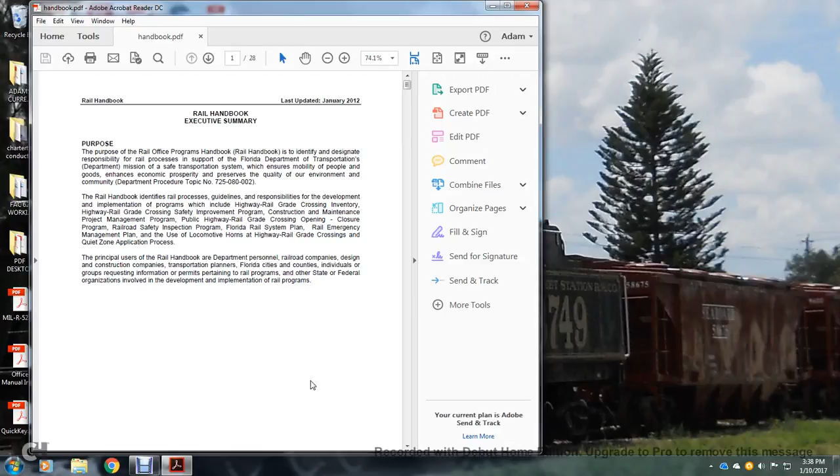All right, hi. We're reading the Florida Department of Transportation Rail Handbook Executive Summary. Last Updated January 2012.

The purpose of the Rail Office Program Handbook: the Rail Handbook is to identify the designated responsibility, rail process, and support with the Florida Department of Transportation mission, a safe transportation system which ensures the mobility of people and goods and enhances economic prosperity, preserves the quality of environment and the community. Department Procedure Topic Number...

725080002. Rail Handbook identifies the rail processes, guidelines, and responsibility for development and implementation of programs, which include Highway Rail Grade Crossing Inventory, Highway Rail Grade Crossing Safety Improvement Program, Construction and Maintenance Project Management Program, Public Highway Rail Grade Crossing Opening and Closure Program, Railroad Safety Inspection Program, Florida Railroad Safety, Railroad System Planning, Railway Emergency Management Plan, use of locomotive horns, and highway rail grade crossing quiet zone application process.

The principal users of the Rail Handbook: Department personnel, railroad companies, design and construction companies, transportation planners, Florida cities and counties, individuals and groups requesting information or permits pertaining to the rail program, and other state and federal organizations involved with the development and implementation of rail programs.

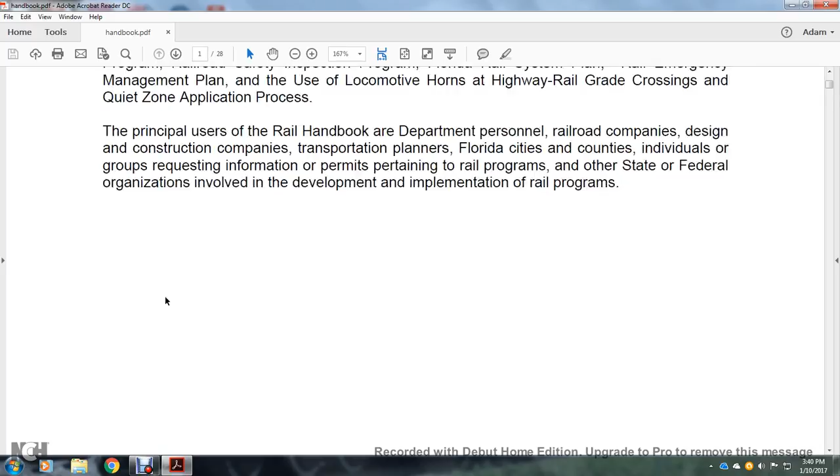Chapter 1: Highway Rail Grade Crossing Inventory. The Department's Highway Rail Grade Crossing Inventory includes the database application of the Highway Grade Crossing Inventory. The Railway Highway Grade Crossing Inventory contains the railroad highway crossing data to support the U.S. Department of Transportation Highway and the Federal Highway Administration, Federal Railroad Administration Highway Railway Crossing Safety Program and initiatives.

The Federal Railroad Administration requires the Department to collect and report data elements, including the requirements of data collection and data entry of the railway highway crossing inventory.

Data definitions: railroad crossing is an intersection of the railroad corridor with a road, roadway, or bicycle pedestrian pathway intersecting at the grade or at the grade separation of a public or private passageway. Highway rail grade crossing is a location where the railroad track is crossed at grade by a public or private roadway. The rail highway crossing inventory.

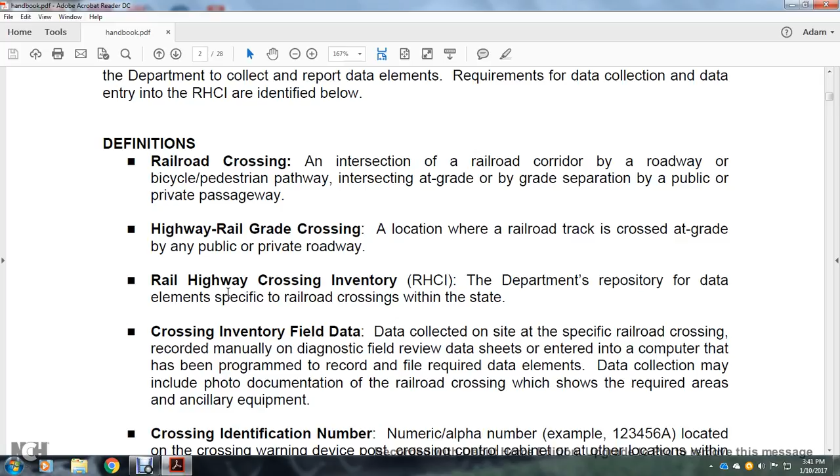The department RHCI is the department's repository for data elements specific to the railroad crossings within the state. Crossing inventory field data is the data collected on site at a specific railroad crossing, recorded manually on diagnostic field review data sheets, then entered into the computer, which has been programmed to record and file the required data elements. Data collection may include photo documentation of the railroad crossing, showing the required areas and ancillary equipment.

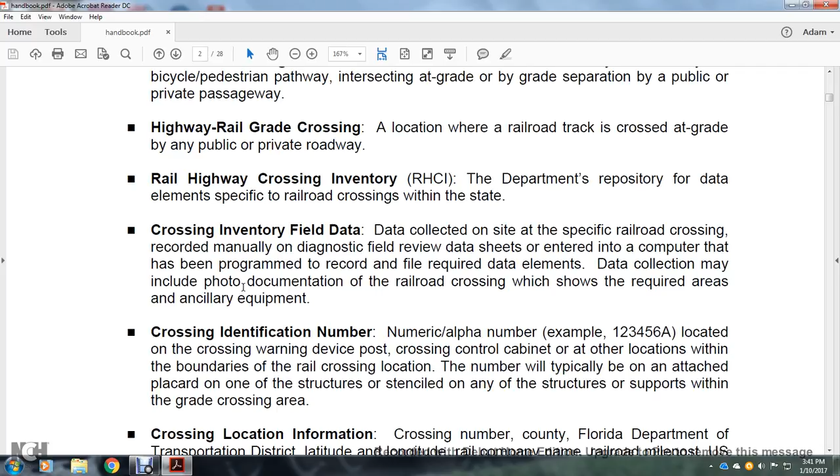Crossing identification number: the numeric alpha number, for example 123456A, located on the crossing warning device post, crossing control cabinet, and other locations within the boundaries of the railroad crossing location. The number is typically on an attached placard on one of the structures supporting the grade crossing area.

Crossing location information includes crossing number, county, Florida Department of Transportation district, latitude, longitude, rail company name, railroad milepost, U.S. route number, crossing street name or number, or any other additional information that supports the proper location of a crossing site. Crossing status indicates one of several combinations of status for the roadway and/or track.

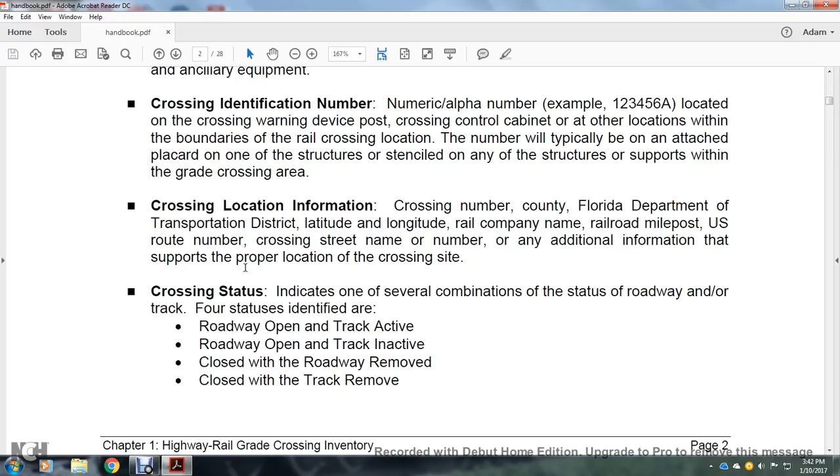Four statuses are identified: roadway open/track active, roadway open/track inactive, closed with roadway removed, and closed with track removed.

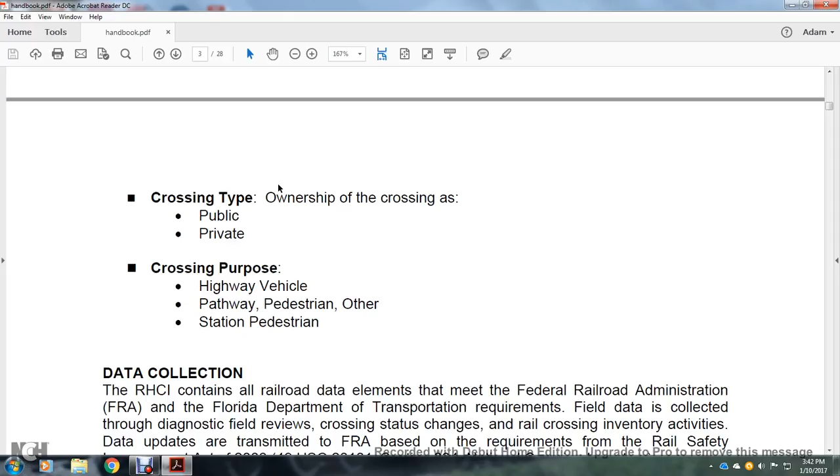Crossing type indicates ownership of the crossing as public or private, and purpose: highway vehicle, pathway pedestrian, or other pedestrian station. Data collection: the railroad highway crossing inventory contains all railroad data elements meeting the Federal Railroad Administration and Florida Department of Transportation requirements.

Field data is collected through diagnostic field reviews. Crossing status changes in the rail crossing inventory activity data are updated and transmitted to the FRA based on requirements from the Rail Safety Improvement Act of 2008, Title 49 U.S. Code 20160, Section 204, National Crossing Inventory.

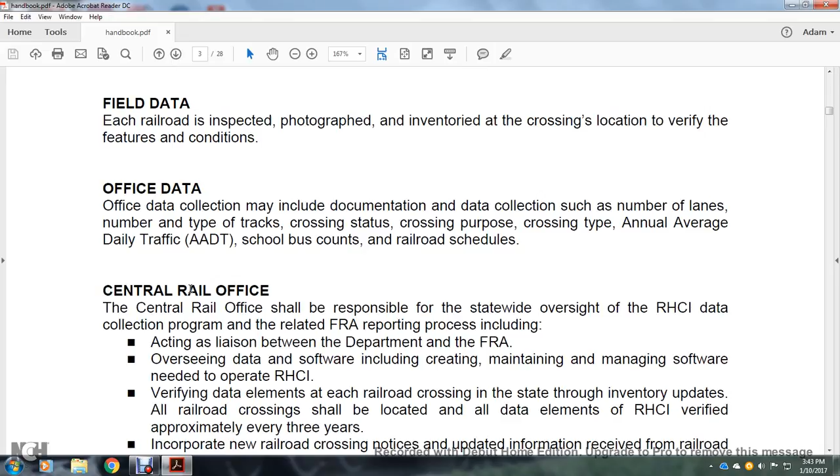Field data: each railroad crossing is inspected, photographed, and inventoried at the location to verify its features and conditions. Office data collection may include documentation such as number of lanes, number and type of tracks, crossing status, crossing purpose, crossing type, annual average daily traffic (AADT), school bus counts, and railroad schedules.

The Central Rail Office shall be responsible for statewide oversight of the railway highway crossing inventory data collection program related to the FRA reporting process, including acting as liaison between the department and the Federal Railroad Administration, overseeing the data and software, including creating, maintaining, and managing software needed to operate the railroad highway crossing inventory, and verifying the data elements for each railroad crossing in the state so that the inventory is updated and all railroad crossings are properly located.

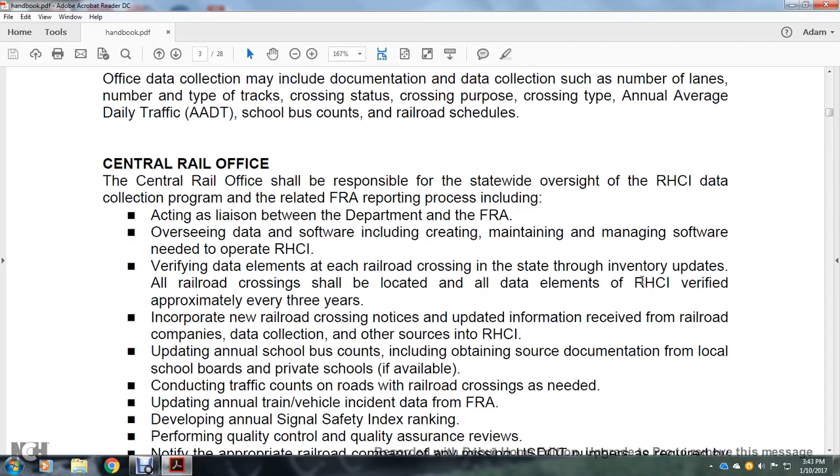All data elements for the railroad highway crossing inventory are verified approximately every 3 years, incorporating new railroad crossing notices, updating information received from the railroad company's data collection and other sources into the railroad highway crossing inventory, updating annual school bus counts including obtaining documentation from local school boards and private schools if available, conducting traffic counts on roads with railroad crossings as needed, updating annual train vehicle incident data from the FRA, developing annual signal safety index ranking, performing quality control and quality assurance reviews, and notifying the appropriate railroad company of any missing U.S. DOT numbers as required by the FRA.

District offices: the district rail coordinators shall provide technical data field support with collecting the crossing characteristic modifications as identified crossing status changes, openings, closures, new installations. The impact on the railroad highway crossing inventory should be reported.

The railway highway crossing inventory updates include population of the railroad highway crossing inventory when a railroad crossing is officially opened or closed, upgraded or modified, verifying the protection, project completions, closures and changes. Update the railroad highway crossing inventory when a new crossing warning device or service is installed, and when the railroad submits a new U.S. DOT grade crossing inventory form. Forward the completed U.S. DOT Department of Transportation grade crossing inventory form to the FRA, with compliance through the Central Rail Office.

Chapter 2, Highway Railway Grade Crossing Safety Improvement Program.

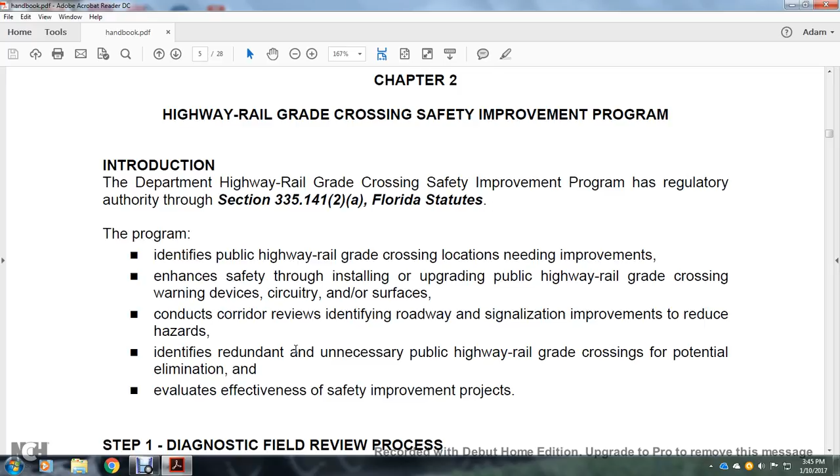Introduction: the Highway Railway Grade Crossing Safety Improvement Program has regulatory authority under section 335.141(2)(a) Florida State Statutes. The program identifies public highway railway grade crossing locations needing improved and enhanced safety through installing and upgrading public highway rail grade crossing warning devices, circuitry, and/or surfaces; conducting corridor reviews and identifying roadway signalization improvements to reduce hazards; identifying redundant and unnecessary public highway railway grade crossings for potential elimination; and evaluating the effectiveness of safety improvement projects.

Step 1, Diagnostic Field Review Process: incidents are entered into the Railroad Highway Crossing Inventory by May. The Central Rail Office enters the rail crossing incidents into the Railway Highway Crossing Inventory for the preceding calendar year and calculates the safety index for each crossing.

A priority list of crossings for review is created during May. Each district rail coordinator will review the safety index report from the railway highway crossing inventory, listing crossings based on the safety index rank. The priority listing can be adjusted by eliminating and adding crossings based on the existing warning device compared with the recommended warning device. Crossings on a prior diagnostic field review list are determined to be poor candidates for safety signal improvement at the time, unless conditions have changed.

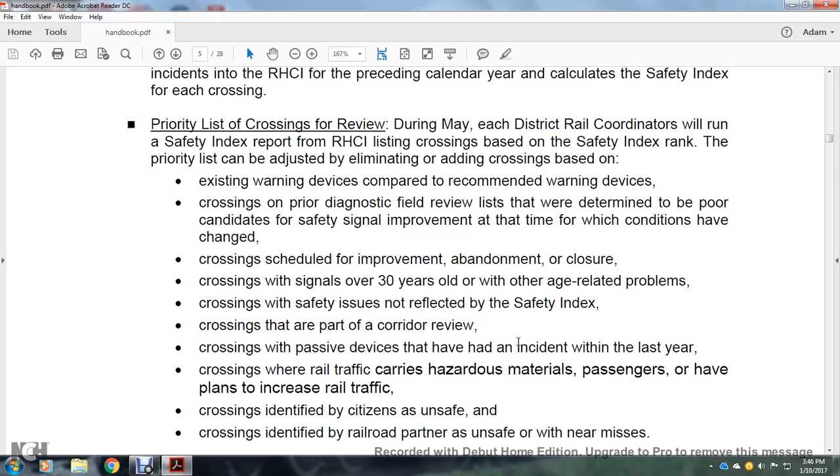Crossings scheduled for improvement, abandonment, and closure. Crossings with signals over 30 years old or other age-related problems. Crossings with safety issues not reflected in the safety index. Crossings as part of a corridor review. Crossings with passive devices that have had incidents in the last year. Crossings where rail traffic carries hazardous materials or passengers with plans to increase rail traffic. Crossings identified by citizens as unsafe. Crossings identified by railroad partners as unsafe or with near misses.

Schedule for the diagnostic field review: the Central Rail Office will coordinate the schedule of diagnostic field reviews with each district rail coordinator. The general time frame for the reviews is during the summer, from May to August. The district rail coordinator will determine the diagnostic field review locations and coordinate with the railroad companies and local agencies.

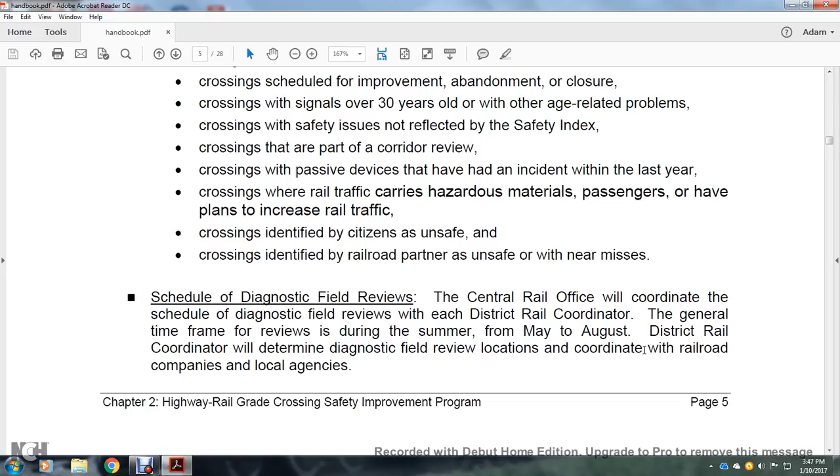The diagnostic field review team members at each district will prepare the diagnostic field review data sheets and incident reports for each crossing to be reviewed. The diagnostic field review team should be...

multidisciplinary, with the ability to evaluate conditions and recommend crossing safety improvements. It should include the central district rail representative, district safety and/or traffic operations engineering, railroad personnel if applicable, and engineering personnel from the city or county with jurisdictional authority over the crossing. These parties should be notified by the district railway coordinator with the time, place, and crossing data information. The district rail coordinator will confirm each team member's participation in the review.

The diagnostic field review team observations should include railroad classification (mainline, branch, industrial spur), train traffic mix, switching, through or passenger operations in the vicinity of the crossing, crossing condition, visibility, warning devices including advance warning signals and pavement markings, and other traffic control devices contributing to vehicles stopping on the crossing that may require signal preemption.

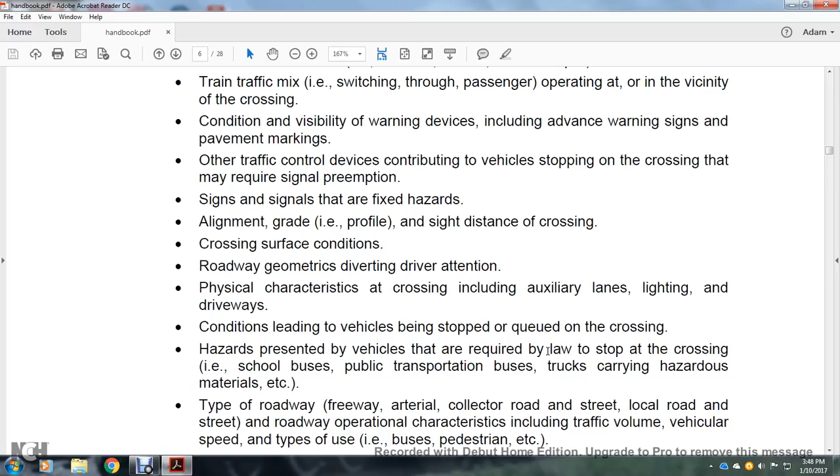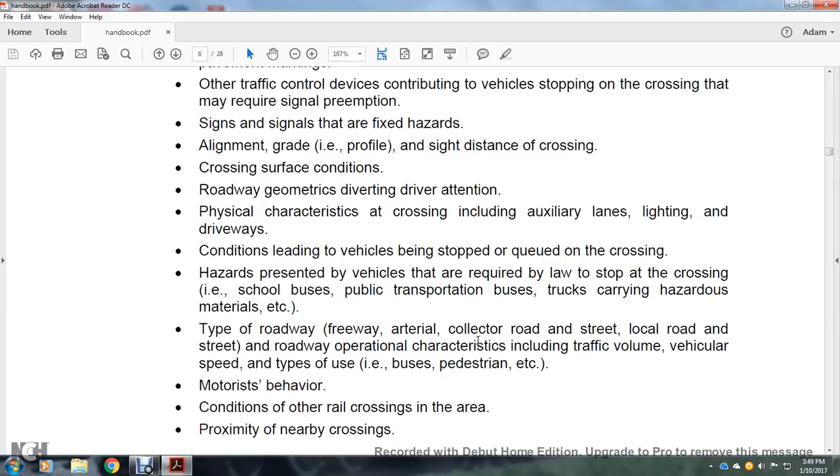Signs and signals that are fixed hazards, alignment, and grade profile, and sight distance of the crossing, crossing surface conditions, roadway geometrics, diverting of the driver attention, physical characteristics of crossing including auxiliary lines, lanes, lighting, and driveways, conditions leading to vehicles being stopped and queued on the crossing, hazards presented with the vehicles required by law to stop at the crossing, i.e. school buses, public transportation buses, trucks carrying hazardous materials, etc. Type of roadway, freeway, arterial, collector roadway, streets, local roads and streets, roadway operational characteristics including traffic volume, vehicular speed, and type of use, buses, pedestrians, etc. Motorist behavior, conditions of other rail crossings in the area, proximity to nearby crossing.

The diagnostic field review team data collection. The diagnostic field review team will note the crossing information that is incorrect or missing later in the entry of the railway highway grade crossing inventory.

The diagnostic field review team recommendations based on the evaluation of the crossing. The team may recommend the following safety improvements compliant with Chapter 14-57.012(3) of the Florida Administrative Code, Florida Department of Transportation Design Standards Topic Number 625010003, and the Manual on Uniform Traffic Control Devices (MUTCD): the DOT crossing number identification, emergency notification system signs, flashing lights and gates.

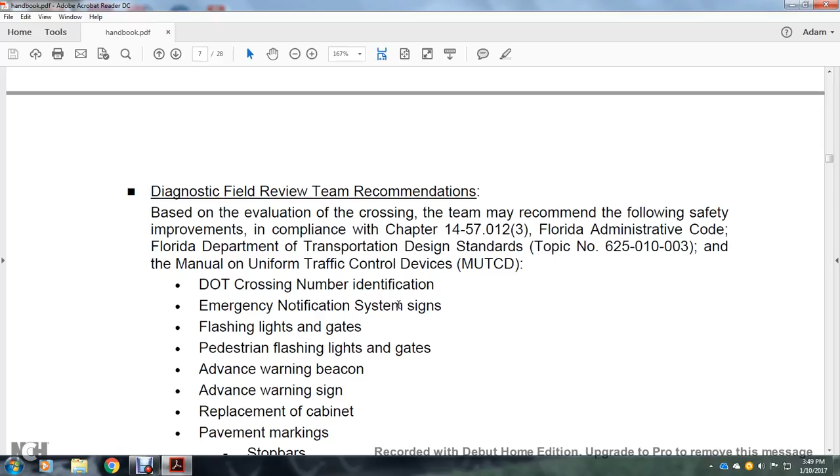Pedestrian flashing lights and gates, advanced warning beacon, advanced warning sign, replacement of the cabinet, pavement markings, stop bars, railroad crossing marks, additional signage, pavement markings, do not stop on the track, and number of the track signs, yield sign, stop sign, low ground clearance sign, ADA improvement signage, overhead illumination, traffic and signal installation preemption, advance and simultaneously.

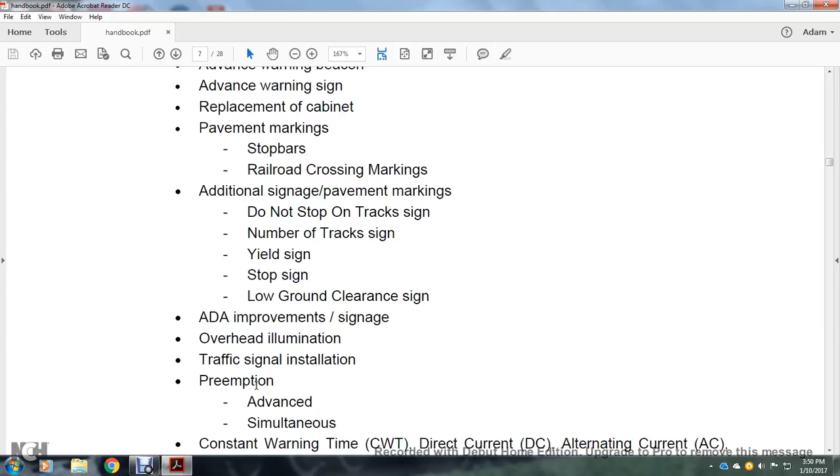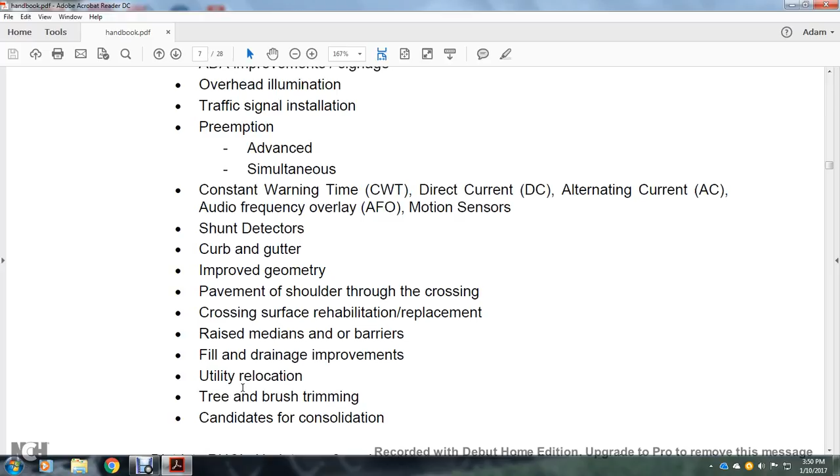Constant warning time (CWT), direct current, alternating current, audio frequency overlay, motion sensor, shunt detectors, curb and gutter, improve the geometry, pavement, shoulder through the crossing, surface rehabilitation, replacement, raised medians, barriers, fill and drainage improvements, utility relocation, tree and brush trimming, and candidates for consolidation.

District Railway Highway Crossing Inventory Update. Crossing data corrections and additions acquired during the diagnostic field review will be updated with the Railway Highway Crossing Inventory with the District Rail Coordinator.

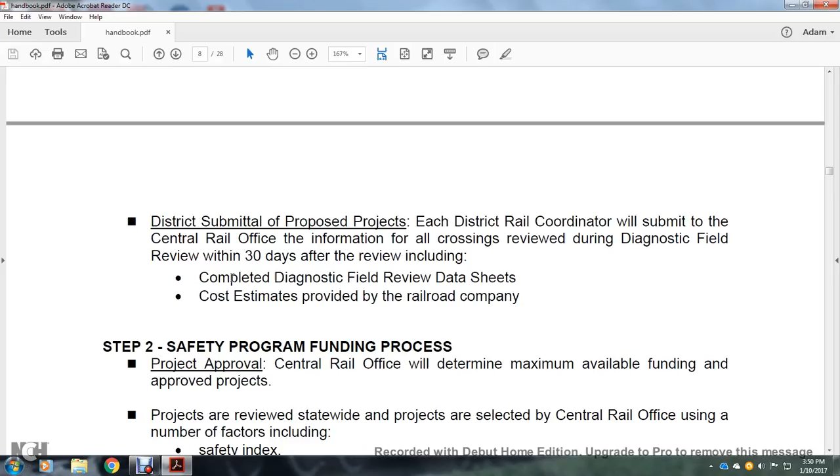The district submits the proposed project; the district rail coordinator will submit to the central rail office information on all crossings reviewed during the diagnostic field review within 30 days after the review, including the complete diagnostic field review data sheets and cost estimates provided by the railroad company. Step 2 Safety Program funding process.

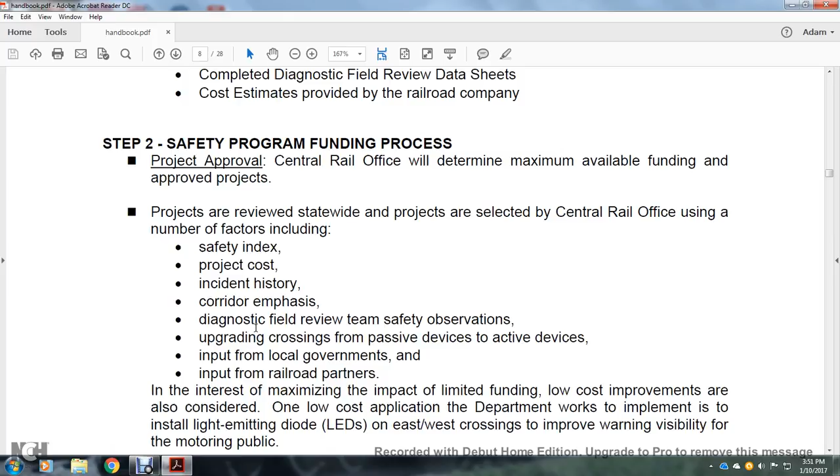Project approval: the central rail office determines the maximum available funds and approves projects reviewed statewide. Projects are selected by the central rail office using a number of factors, including safety index, project costs, incident history, corridor emphasis, diagnostic field review team safety observation, upgrading of passive devices to active devices, local government input, and railroad partners. In the interest of maximizing impact with limited funding, low-cost improvements are also considered.

One of the low-cost applications the department works to implement is to install light emitting diodes, or LEDs, on the east and west crossings to improve the warning and visibility for the motoring public.

Federal aid and project number assignment: the central office will submit the list of candidate projects for federal aid office approval. Encumbrance of funds: each district will encumber the funds with the comptroller's office for each safety improvement project.

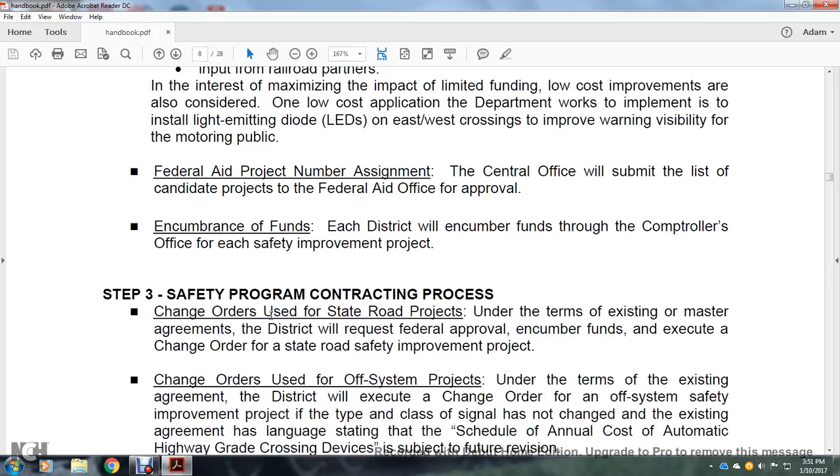Step 3, Safety Program Contracting Process. Change orders used for state road projects under the terms of existing or master agreements: the district will request federal approval for encumbering funds.

Execute change orders for state road safety improvement projects. Checking and change orders used for off-system projects under the terms of existing agreements: the district will execute the change order for the off-system safety improvement project if the type and class of signal has not changed from existing agreements.

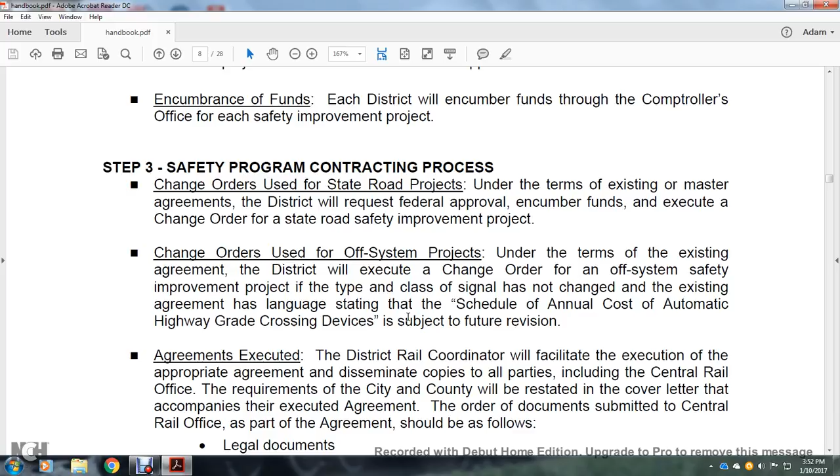The agreement has language stating that the schedule of annual costs of the automatic highway grade crossing devices is subject to future revision. Agreements executed with the District Rail Coordinator will facilitate execution of the appropriate agreement, disseminating copies to all parties, including the Central Rail Office.

The requirements of the City and County will be restated in the cover letter that accompanies the executed agreement. The order of documentation submitted to the Central Rail Office as part of the agreement should be as follows:

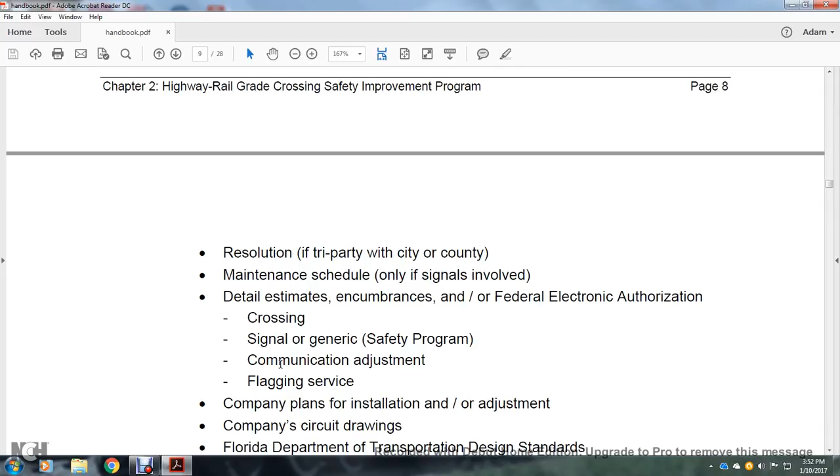Legal documents, resolutions if tri-party with the City or County, maintenance schedule only if signals are involved, detailed estimate, encumbrance and federal electronic authorization, crossing signal generic safety program, communication adjustment, flagging service, company plans, installation adjustment, company circuit drawings, and Florida Department of Transportation Design Standards 560 if crossing signals are involved.

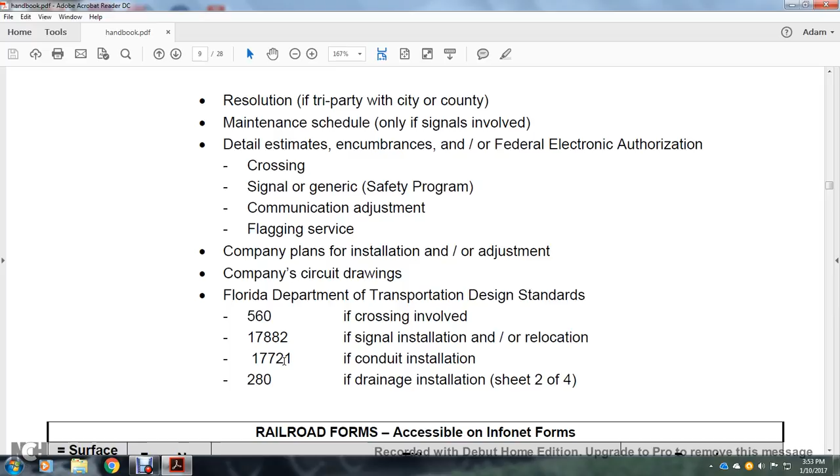Design Standard 17882 if signal installations or relocation; 17721 if conduit installation; 280 if drainage installation, sheet 2 of 4.

This shows the accessible railroad forms in Infonet: railroad daily diary, railroad changing order, railroad relocations schedule, work description, grade crossing new/reconstruction work description, grade crossing traffic control device, and railroad reimbursement agreement for grade crossing.

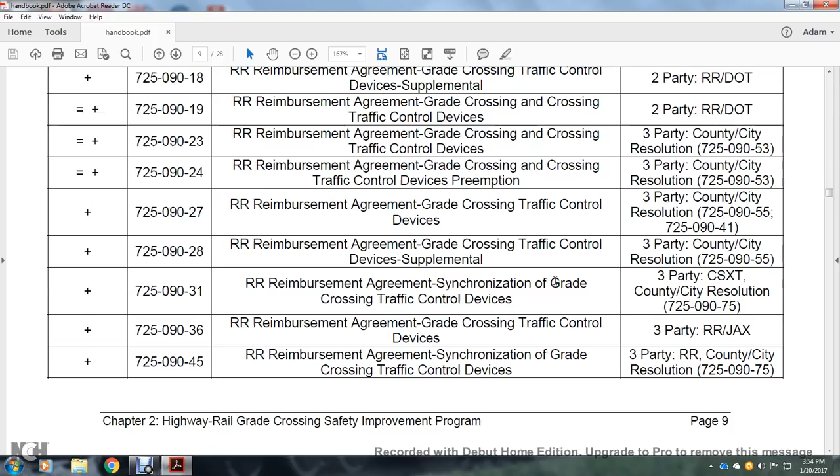Additional forms include the railroad reimbursement agreement grade crossing traffic control device supplemental, synchronization of grade crossing traffic control devices, County City Resolution for grade crossing traffic control device (including three-party versions), synchronization grade crossing traffic control device, and notice of reimbursable or non-reimbursable utility construction work.

Step 4, construction installation process: preliminary engineering design. Preliminary engineering made by the railroad company begins with verification of the project scope letter from the district. The district reviews the design package and submits approval for the railroad with notice to proceed with construction installation.

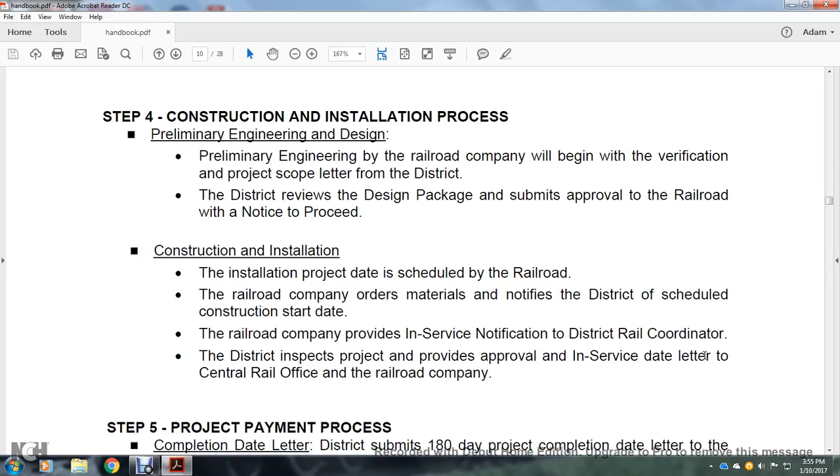The installation project is scheduled with the railroad. The railroad company orders the materials and notifies the district of the scheduled construction start date, then provides in-service notification to the District Rail Coordinator. The district inspects the project, provides approval, and issues the service date letter to the central rail office and the railroad company.

Step 5, project payment process: completion date letter. The district submits a 180-day project completion date letter to the railroad. The final bill from the railroad is received by the district within 180 days, and the district furnishes payment within 45 days.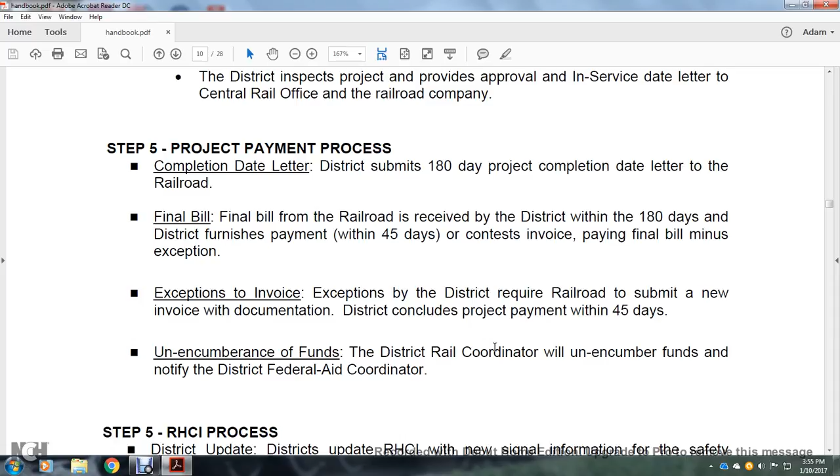The district contests the invoice, paying the final bill minus exceptions. For exceptions, the district requires the railroad to submit new invoice documentation, and the district concludes the project payment within 45 days. Unencumbered funds go to the district rail coordinator with the encumbrance fund, who notifies the district federal aid coordinator.

Step 5 (railroad highway crossing inventory process): district update. The district updates the railroad highway crossing inventory with the new signal information for the safety improvement project.

Step 6, program evaluation: six years before and after report. Each July, the Central Rail office will submit a six-year before and after report. The report is a project cost summary comparing incidents with track volume over the periods of six years before and six years after project completion, including quality assurance reviews on selected projects for compliance with these processes.

Lump sum payments may be made when the railroad and department agree to this method. The eligible railroad work is limited to $100,000 maximum reimbursement, and includes high intensity reflectorized crossbuck projects, warning device upgrades, light lens replacement programs, and crossing inventory and identification projects.

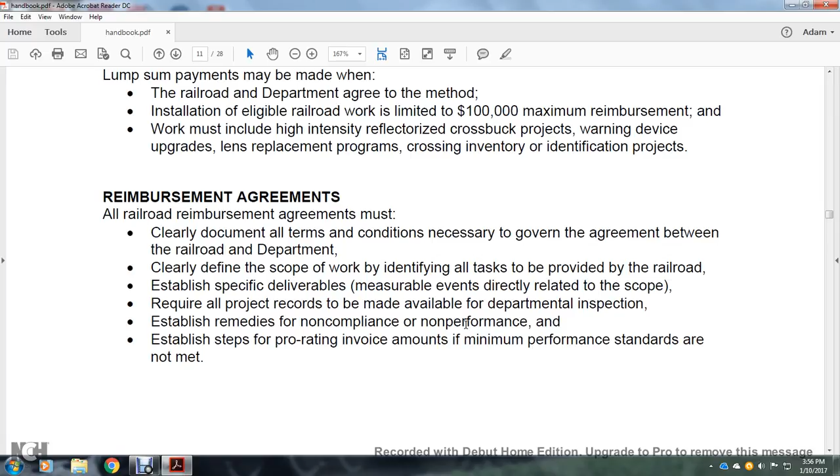Reimbursement agreement: the railroad reimbursement agreement must clearly document all terms and conditions necessary for the agreement between the railroad and department, clearly define the scope of work, identify all tasks provided by the railroad, establish and specify deliverables and measurable events directly related to the scope, require all project records be made available for department inspection, and establish remedies for non-compliance and non-performance, including steps for prorating invoice amounts when minimum performance standards are not met.

Chapter 3: Highway-Rail Grade Crossing Construction and Maintenance Project Management Program. Introduction: construction and maintenance of highway-rail grade crossings, including new construction, reconstruction, widening, and/or resurfacing of the road at or near the right-of-way of the highway-railway grade crossing, requires negotiation with the railroad and local governments in accordance with Section 337.11 Florida Statutes and Rule Chapter 14-57 Florida Administrative Code.

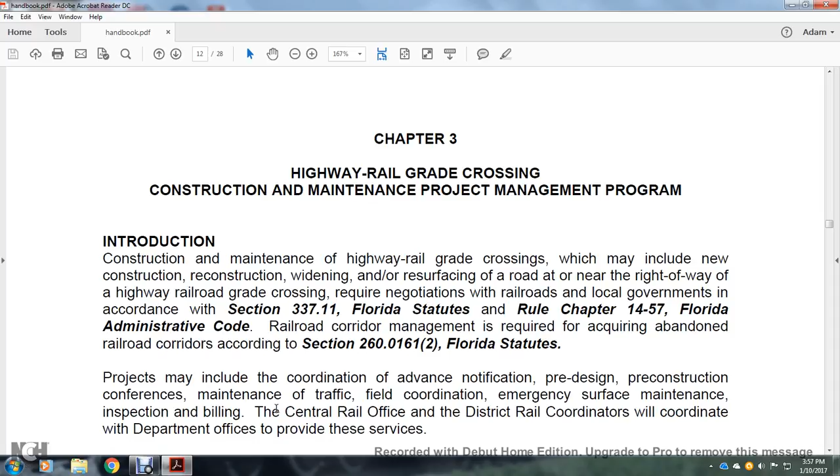Railroad corridor management is required for the acquisition of abandoned railroad corridors according to Section 260.0161 Florida State Statute. Projects include coordinated advance notification, pre-design and pre-construction conferences, maintenance of traffic and field coordination, emergency surface maintenance, inspection, billing, and the Central Rail Office. The District Rail Coordinator coordinates with the Department Office to provide these services.

The Central Rail Office's responsibilities are necessary to provide the district with project development, submit project data to the Federal Aid Office, scheduling and coordinating flagging, leading efforts with railroad construction projects involved in work not associated with highway-rail grade crossing warning devices and surface maintenance, and leading the development of any agreement negotiated with railroad partners.

Ensure compliance with requirements assigned to the Department by the Memorandum of Agreement between the Florida Department of Environmental Protection and the Department regarding the abandonment of railroad corridor rights of way.

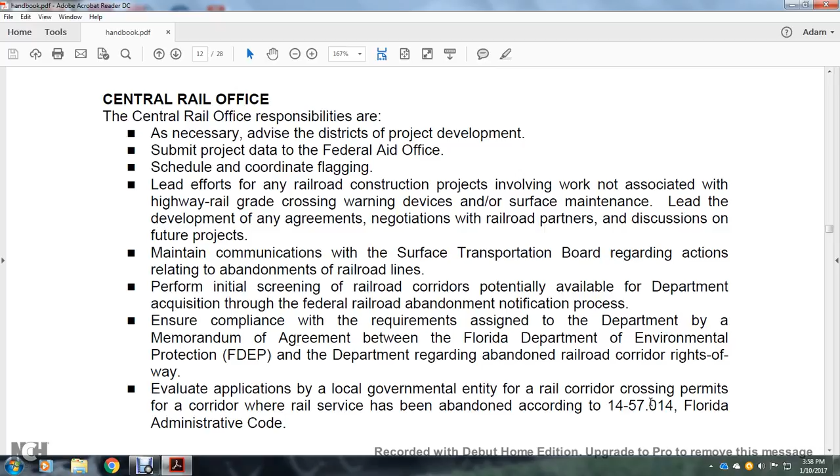Evaluate the application by the local government entity for rail corridor crossing permits for a corridor where rail service has been abandoned, in accordance with Section 14-57.014, Florida Administrative Code. District Rail Coordinators.

The District Rail Coordinator is responsible for reviewing plans to determine eligible reimbursement costs for removal, relocation, and installation of railroad facilities, construction project limitations, and submitting construction contract documents, including work description sheets and construction plans, to the railroad company.

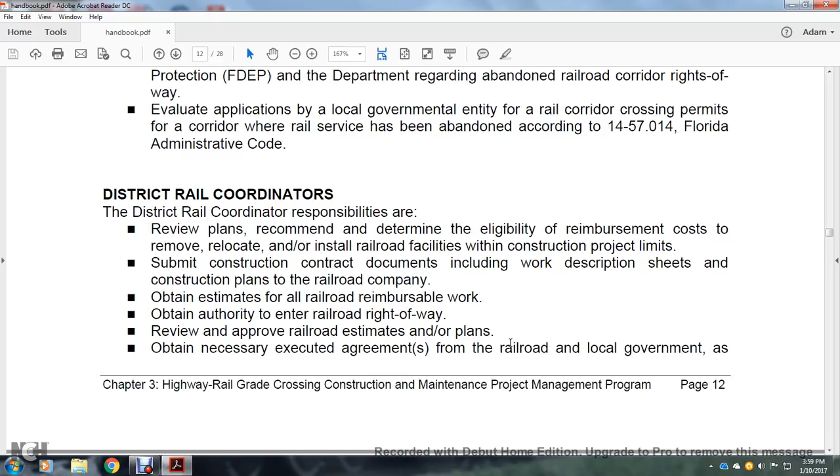Obtain estimates of the railroad reimbursement work, obtain authority for entry onto railroad right-of-way, review and approve railroad estimates and/or plans, obtain necessary executed agreements with the railroad and local government as required, obtain funding, ensure execution of the agreement and change orders, and distribute agreements and change orders to all parties.

Ensure authority to proceed with the work, attend the pre-construction conference with the highway contractor and railroads to identify responsibilities, establish the schedule of work, schedule and coordinate flagging, and coordinate emergency surface maintenance repairs within the Department of the railroad.

Coordinate any railroad construction projects involving work associated with the highway, railway road crossing, and warning devices, surface maintenance with the Central Office of Rail staff, and coordinate development of agreements and negotiations with railroad partners.

Discuss future projects, conduct site review prior to commencement of work on the railroad right-of-way for replacement or relocation of facilities, conduct daily inspections, request daily reports to department personnel on construction progress of the railroad right-of-way, and obtain final inspection documentation to ensure project compliance and approve invoices for satisfactorily completed work.

Identify state road crossing locations that are affected by the abandonment of railroad corridors, notify the District Right-of-Way Administrator of these locations, and request the acquisition of crossing areas in order to secure integrity of the state railroadway.

Chapter 4: Public Highway Rail Grade Crossing Opening and Closure Program.

Introduction. The Department has regulatory authority over all public railroad highway grade crossings in the state, including the authority to issue permits, which shall be required prior to opening and closing such crossings.

Section 335.141, Florida State Statutes. Definition: Applicant. Any person or group impacted, with the crossing railroad operating through the crossing, governmental entity of jurisdiction over the road, and the Department.

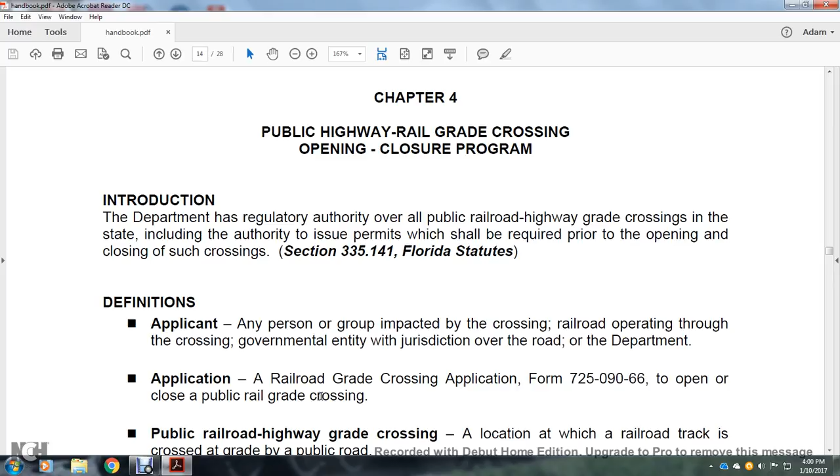Application of the railroad grade crossing application form 725-090-66 to open and close a public railroad grade crossing, a location at which the railroad track is crossed at grade by a public road. Stipulation: a voluntary agreement between the Department and the railroad, government entity, and parties with standing.

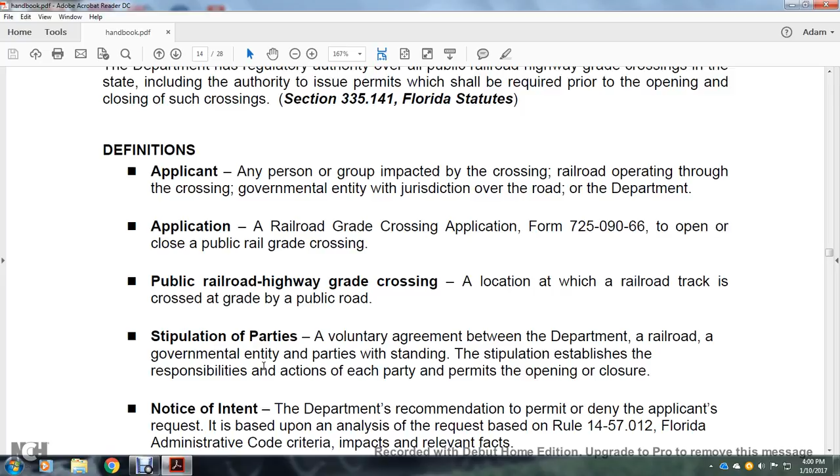Stipulation establishes the responsibility and actions of each party for permitting the opening and closure. Notice of the Department's recommendation to permit or deny the application request based upon analysis of the request.

Based on Rule 14-57.012, Florida Administrative Code, criteria, impacts, and relevant facts.

Administrative hearings: a hearing based on Section 120, Florida State Statutes, in which the administrative law judge hears testimony and arguments on all issues involved, resulting in a recommended order. The order entered by the administrative law judge following the hearing supports the order to either deny or allow the opening and closure.

Final order: the order issued by the Department Secretary may be adoption of the recommended order, or may overrule the order and authorize denial of the application's request.

Rule 14-57.012, Florida Administrative Code, criteria in accordance with the application to open and close the public railway highway grade crossing. The following criteria will apply: status, safety, necessity of the railway, vehicle traffic, alternate routes, and the effect on rail operation expense.

Extensive restrictions on emergency vehicles resulting from closure of one or more public crossings, offset by opening a new crossing; design of the grade crossing and road approaches; the presence of multiple tracks that affect railroad and highway operations; and the administrative process.

The function and facility of the public highway railway grade crossing process is conducted with the Central Rail Office, with the following.

The Central Rail Office reviews the application to ensure the necessary information is provided with the crossing of the public at the grade railway crossing. The Central Rail Office acknowledges receipt and seeks the response of all affected parties, but does not primarily participate in the evaluation.

The application must establish compliance with the criteria of 14-57.012 Florida Administrative Code. The Central Rail Office may facilitate negotiation and resolve differences if the application meets the criteria of 14-57.012, and the Florida Administrative criteria is agreed upon by all parties.

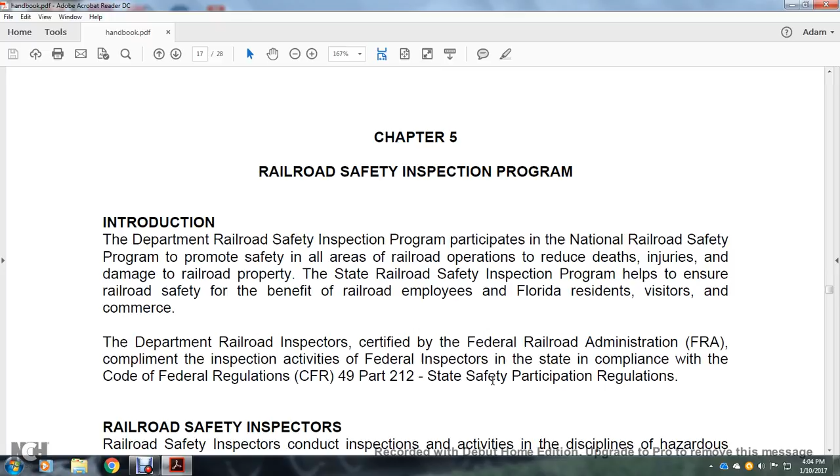Railroad Safety Inspectors conduct inspection activities and disciplines in hazardous materials, motive power and equipment, operating practices, signal and train control, and track inspection overall.

Program inspectors receive training and certification, and use laptop computers issued by the FRA for continuing inspection through the state, completing at least one inspection report for each day of inspection.

The report will include a list of the number of units inspected and a detailed report of any defects or violations, sent in a timely manner to the FRA and the railroad.

Inspectors cover Amtrak, commuter railway operations, Class 1 through 3 railroads, seaport terminal switching companies, and tourist railroads, providing information and guidance for railroad compliance with federal regulations.

Inspectors examine businesses that ship or receive transloaded hazardous materials, recommend civil penalties for non-compliance with federal regulations, conduct complaint investigations, and conduct incident and collision investigations supporting the FRA and the National Transportation Safety Board.

Hazardous Material Inspector: The Railroad Safety Inspector for Hazardous Material, RSI-HM, conducts inspections under CFR 49, Parts 171 through 174, Title 49 U.S. Code, Chapter 51, federal regulation of the transportation of hazardous materials, in cooperation with the Federal Railroad Administration, Homeland Security, the Transportation Security Agency, and local authorities.

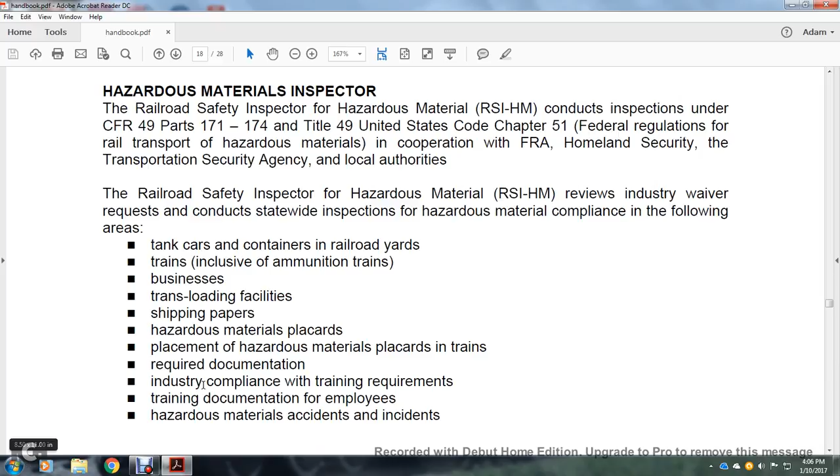The Railroad Safety Inspector for Hazardous Material reviews industry waiver requests and conducts statewide inspections for hazardous material compliance in the following areas: tanker cars, containers, and railroad yards; trains, inclusive of ammunition trains; businesses and transloading facilities; shipping papers and hazardous material placards; placement of hazardous material placards on trains; required documentation; industry compliance with training and equipment requirements; and training documentation for employees regarding hazardous material accidents and incidents.

Motive power and equipment. The Railroad Safety Inspector for motive power and equipment conducts inspection throughout the state of passenger locomotives, cars, freight locomotives, and industrial equipment, and prepares the railroad rolling stock inspections per federal regulation Title 49 CFR Part 215, 223, 229, 231, 232, 238, and 239.

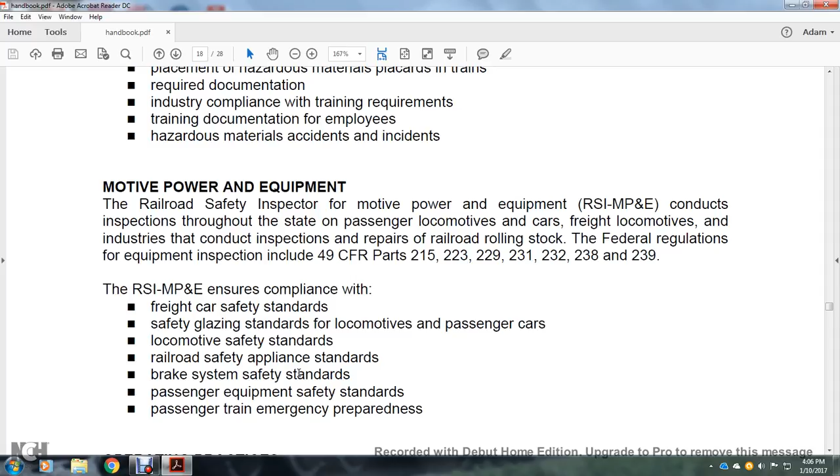The Railroad Safety Inspector of motive power and equipment ensures compliance with freight car safety standards, safety glazing standards for locomotives and passenger cars, locomotive safety standards, railroad safety appliance standards, brake system safety standards, passenger equipment safety standards, and passenger train emergency preparedness.

Operating practice: the Railroad Safety Inspector for operating practice ensures compliance with operational regulations found in Title 49 CFR Part 214, 217, 218, 219, 220, 221, 222, 225, 228, 232, and 240.

Inspections include compliance with the following areas: railroad operation safety rules, regulations concerning training and testing of operating employees, protection of employees working on the track or equipment, drug and alcohol prohibition, railroad communications and training identification, use of locomotive horns, accident and incident injury reporting, hours of service for operating employees, securing unattended equipment, and engineer certification.

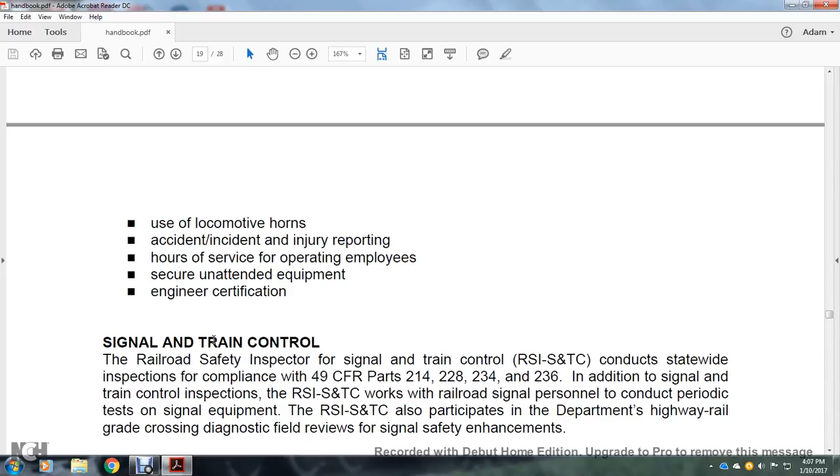Signal and train control. The Railroad Safety Inspector for signal and train control conducts statewide inspection for compliance with Title 49 CFR Part 214, 228, 234, and 236.

In addition to signal and train control inspection, the Railroad Safety Inspector works with railroad signal personnel to conduct periodic tests on signal equipment, and also participates in the Department's Highway Railway Grade Crossing Diagnostic field reviews for signal and safety enhancement.

Railroad safety inspection includes highway railway grade crossing signals, railroad wayside signals, cab signals, wayside locomotive apparatus, and positive train control systems.

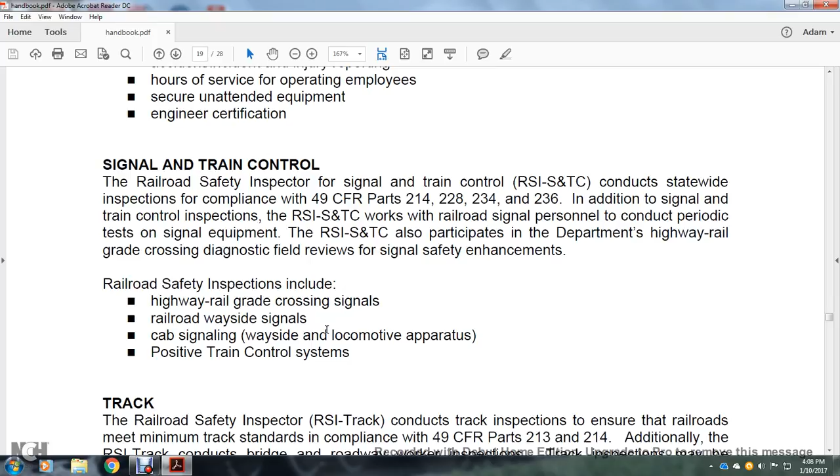Track. The railroad safety inspector conducts track inspection duty to ensure the railroad meets minimum track standards in compliance with Title 49 CFR Part 213 and 214. Additionally, the railroad track safety inspector conducts bridge and roadway work inspections.

Track inspection may be conducted with a high rail vehicle traveling on the track, walking inspection, or FRA geometry cars. Observations may also be made while moving, by riding in the locomotive or the rear car of passenger trains.

Chapter 6, Florida Rail System Plan. The Department is responsible for developing the Florida Rail System Plan according to Section 341.302(3) of the Florida Statute. The Rail System Plan includes identification of priorities, programs, and funding levels required to meet statewide needs. The plan must be updated every 5 years to cover passenger rail service and freight rail service.

The plan must be consistent with other transportation planning conducted by the Department, with recognition of the role rail plays in the state's overall transportation system.

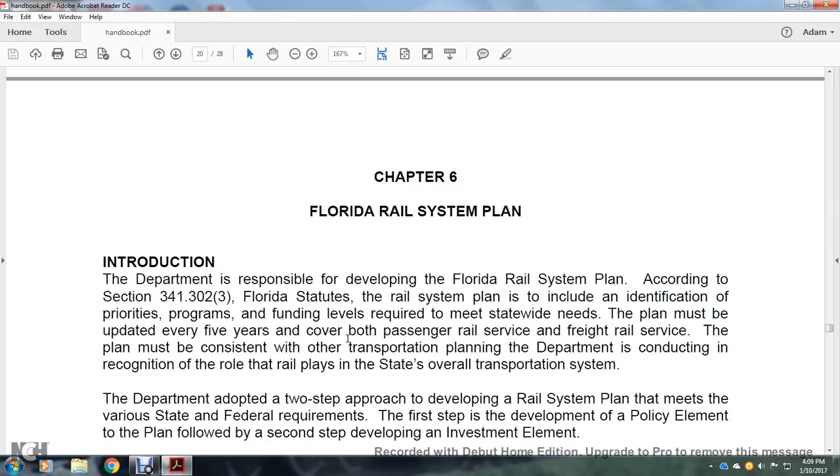The Department adopts a two-step approach to developing the rail system plan that meets various state and federal requirements. The first step is development of the policy element of the plan, followed by the second step of developing the investment element. The policy element establishes a vision for passenger and freight rail transportation in Florida, with a policy framework of goals and strategies to guide future state rail investments and decisions.

The investment element identifies inventory needs and establishes priority investments of state funds, using the policy framework set forth in the policy element to define the future action steps necessary to implement the plan.

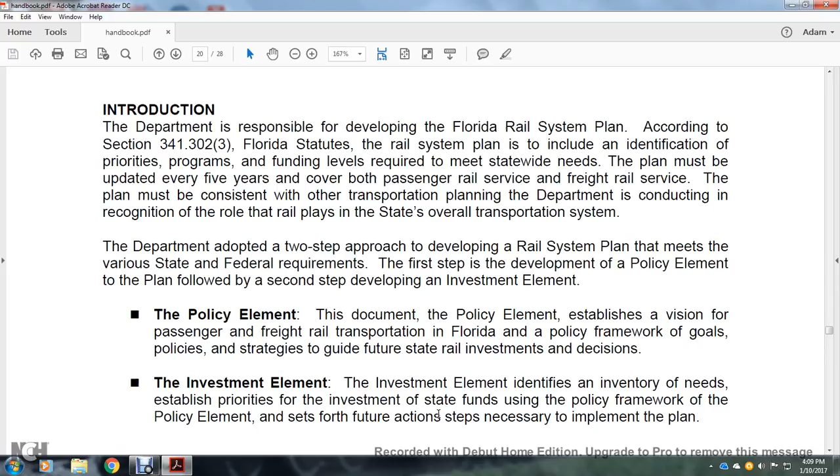Definitions: American Recovery and Reinvestment Act, the economic stimulus package enacted by Congress in 2009. The stimulus was intended to create jobs and promote investment and consumer spending during the recession of 2008 and 2009.

Commuter rail service is passenger rail transportation service between a city center and outer suburbs, commuter towns, and other locations that draw a large number of commuters, people who travel on a daily basis. Trains operate on schedules with speeds varying from 50 to 200 kilometers an hour, or 30 to 125 miles an hour. Distance-based fare changes or zone pricing may be used.

Florida Transportation Plan: the Florida Transportation Plan establishes long range goals and provides the policy framework for expenditure of federal and state transportation funds in Florida. Every 5 years, the Department takes the lead in updating the plan to respond to new trends and challenges, and to meet the future mobility needs of Florida residents, visitors, and businesses.

Freight rail service is the type of rail service comprised of a group of freight cars hauled with one or more locomotives on the railway, ultimately transporting cargo between two points as part of the logistic chain. Trains may haul bulk material or intermodal containers carrying general freight and specialized freight, designed for that purpose.

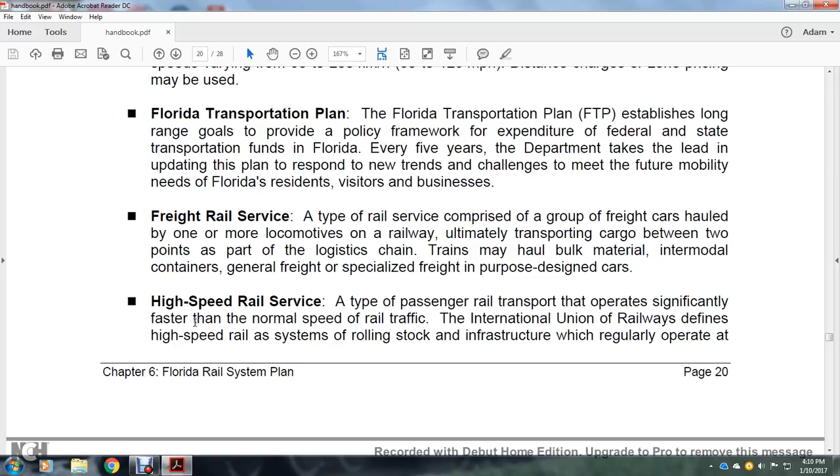High-speed rail service: typical passenger rail transportation that operates significantly faster than normal railway traffic speeds. The International Union of Railways defines high-speed rail as a system of rolling stock and infrastructure regularly operated at above 150 miles per hour on new tracks, or 120 miles per hour on existing tracks. High-speed rail uses continuous welded rail, which reduces track vibration and discrepancies between rail segments enough to allow trains to pass at high speeds.

At high speeds. Intercity passenger rail service is the passenger rail transportation service that covers longer distances compared to commuter and regional trains.

The Passenger Rail Investment and Improvement Act is federal legislation to strengthen the U.S. passenger railway network, tasking Amtrak, the U.S. Department of Transportation, Federal Railroad Administration, states, and other stakeholders with improving service, operations, and facilities. It focuses on intercity passenger rail, including Amtrak long distance routes, the Northeast Corridor, state-sponsored corridors throughout the nation, and the development of high-speed railway corridors.

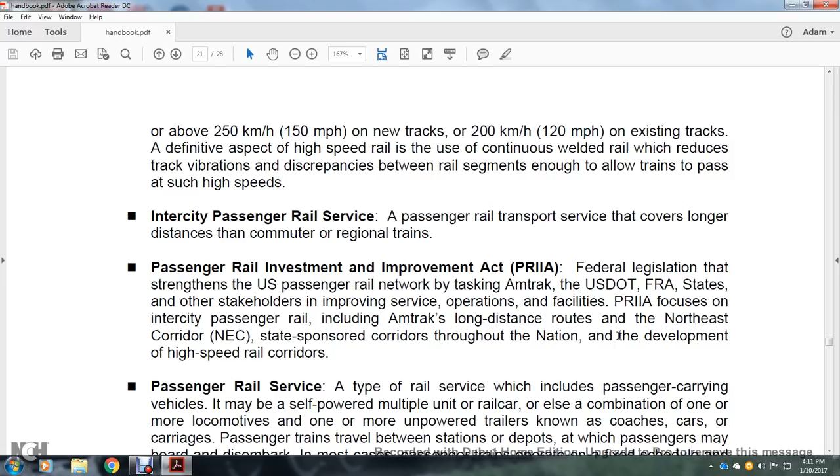Passenger rail service is the type of rail service that includes passenger-carrying vehicles. It may be self-powered as a multiple unit rail car, or it can be a combination of one or more locomotives with one or more unpowered trailers known as coaches, cars, or carriages.

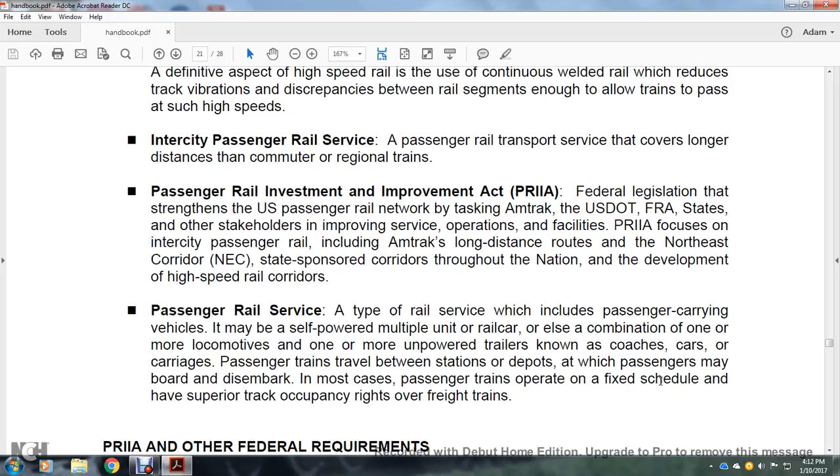Passenger trains travel between stations and depots at which passengers may be boarded or disembarked. In most cases, passenger trains operate on a fixed schedule and have superior track occupancy rights over freight trains.

The American Recovery and Reinvestment Act, passed by Congress in 2009, requires that projects funded under the Intercity Passenger Rail Service Corridor Capital Assistance, Section 301, be included in the state rail plan.

Title 49 U.S. Code Section 22102 requires states that receive federal financial assistance for state rail projects to establish an adequate plan for rail transportation in the state, with suitable provisions for updating, revising, and modifying the plan. Title 49 U.S. Code Section 22705 establishes the guidelines for preparing state rail plans.

Florida Railway System Plan legal requirements: developing a state rail plan is established under Florida State Statute Section 341.302(3), which establishes authority for the Department's Rail Office to prepare, maintain, coordinate, and administer the plan, with the Department Secretary having authority to approve the plan.

The state-approved plan is to be submitted to the U.S. Secretary of Transportation for review. The initial plan shall be completed no later than January 1st, 2011, and shall be revised and resubmitted every 5 years for reapproval by the U.S. Secretary of Transportation. The purpose of the state rail plan is to set forth state policy regarding freight and passenger rail transportation.

This includes commuter rail operations in the state, establishing the period covered by the state rail plan, presenting priority strategies to enhance rail service in the state, and identifying benefits to the public that serve the basis for state rail investment. The state rail plan shall be coordinated with other state transportation planning, with goals and programs set forth for rail's role in the transportation system.

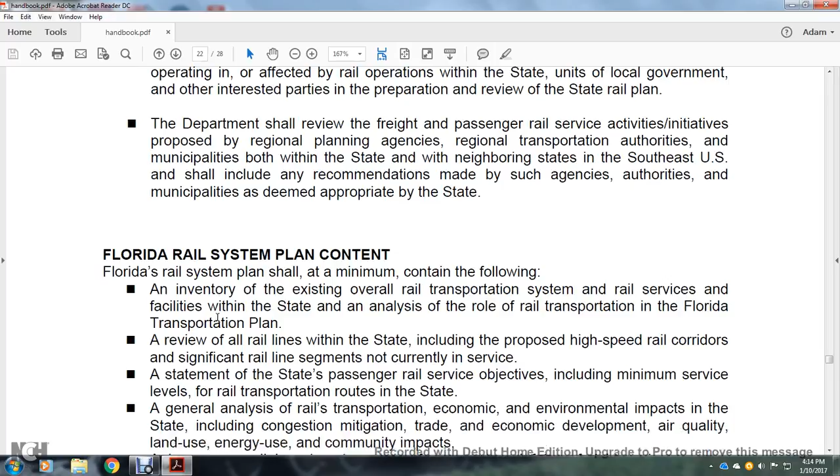Florida Railway System content. Florida Railway System Plan content.

The Florida Railway System Plan shall at minimum contain the following: an inventory of all existing railway transportation rail service facilities within the state, analysis of the role in rail transportation in the Florida Transportation Plan, review of all railway lines within the state including proposed high-speed railway corridors, significant rail line segments not currently in service, a statement of state passenger rail service objectives including minimum service levels and rail transportation routes in the state, general analysis of the rail transportation economic and environmental impacts in the state, including congestion mitigation, trade, economic development, air quality, land use, energy use, and community impacts, along with the rail investment program for current and future freight and passenger infrastructure of the state.

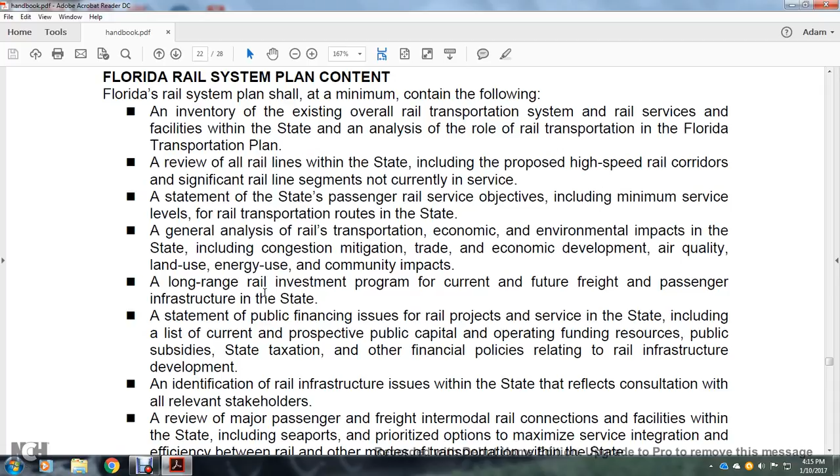The statement of public financing issues for the rail project service in the state, including a list of current and prospective public capital operating and funding resources, public and subsidized state taxation, and other financial policies relating to rail infrastructure development.

The identification of rail infrastructure issues within the state that reflects consultation of all relevant stakeholders, and review of the major passenger, freight, and intermodal rail connection facilities within the state, including the seaports, with priorities to optimize, maximize service, and integrate efficiency between rail and other modes of transportation within the state.

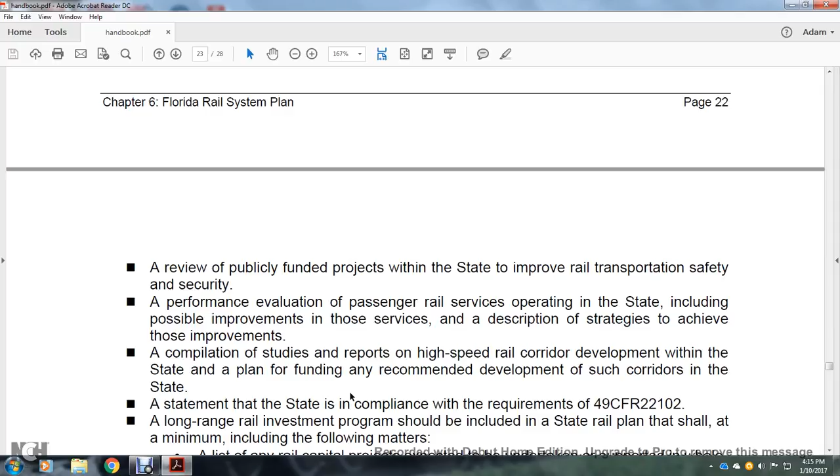A review of publicly funded projects within the state to improve railway transportation safety and security, a performance evaluation of passenger rail service operating within the state including possible improvements to those services, and a description of strategies to achieve those improvements.

The compilation of studies and reports for high-speed railway corridor development within the state, and the plan for funding any recommended development in such corridors, a statement that the state is in compliance with requirements of Title 49 CFR 22102.

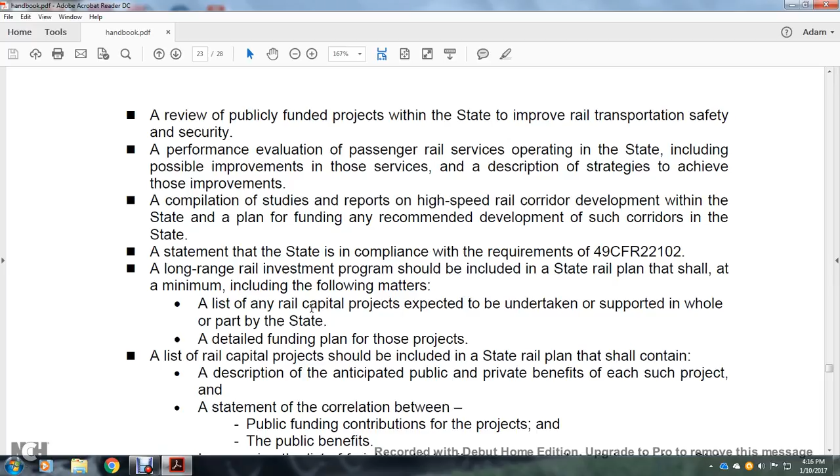Long-range investment programs should be included in the state rail plan, which shall at minimum include the following matters: the list of any rail capital projects expected to be undertaken and supported in whole or part by the state, and detailed funding plans for those projects.

The list of rail capital projects included with the state rail plan shall contain a description of the anticipated public-private benefits of each subject project, and a statement of the correlation between project public funding and contribution to public benefits, preparing the list of intercity passenger rail capital projects for the state.

The Rail Transportation Authority should take into consideration the following matters: contributions made by non-federal, non-state sources, use of fees, matching funds, or other private capital involvement; rail capacity and congestion effects on highway, aviation, and maritime capacity; congestion, safety, regional balance, environmental impact, economic and employment impacts, projected ridership, and other services measured by the passenger rail project.

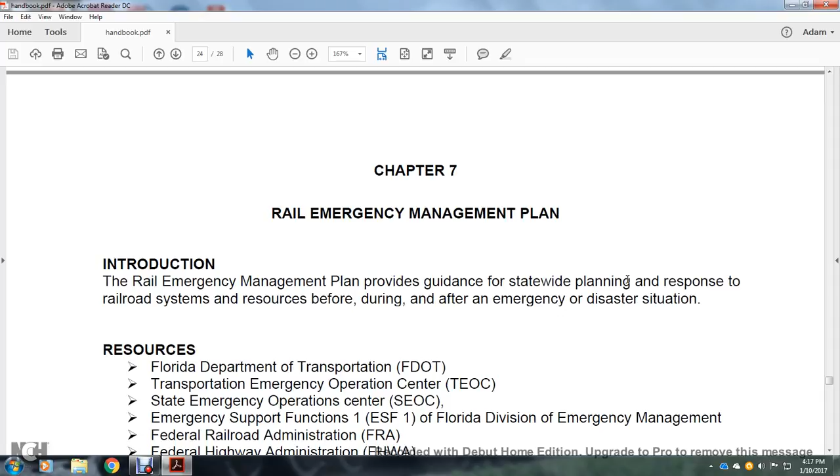Chapter 7, Rail Emergency Management Plan. The Rail Emergency Management Plan provides guidance for statewide planning in responding to the railroad system and resources before, during, and after an emergency or disaster situation.

Florida Department of Transportation, FDOT; TEOC, the Transportation Emergency Operations Center; State Emergency Operations Center, SEOC; Emergency Support Functions, ESF1, for the Florida Division of Emergency Management; Federal Railroad Administration; Federal Highway Administration; and Federal Emergency Management Agency, FEMA.

Activities: the Central Rail Office Manager will assign the Central Rail Office to specific rail functions during the emergency and disaster. The rail resource coordinating with the Central Rail Office will focus on the following activities.

Plan, coordinate, and implement appropriate preventive measures for the emergency disaster situation. Work with the Transportation Emergency Operations Center with affected railroads and district railroad coordinators.

Implement the Department's post-emergency disaster field review and assessment of the highway railroad grade crossings, led by the district railroad coordinators, to determine the highway railway grade crossing impact from the emergency disaster.

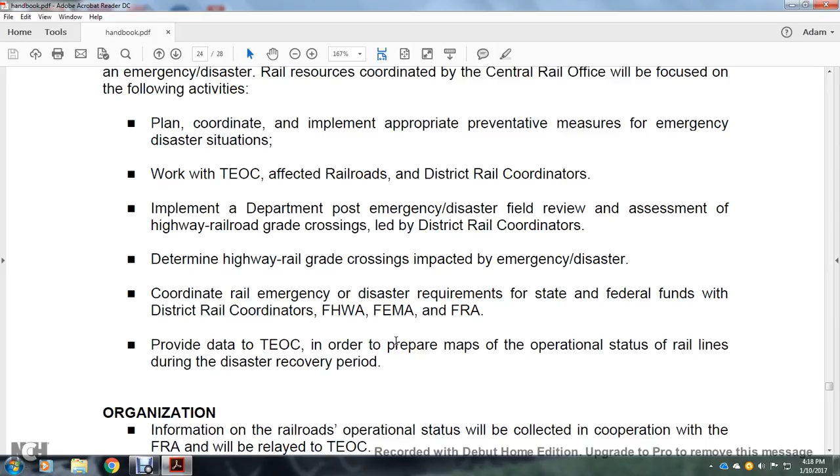Coordinate rail emergency disaster requirements for state and federal funds for the district rail coordinators, for the Federal Highway Administration, the Federal Emergency Management Agency, and Federal Railroad Administration.

Provide data for the Transportation Emergency Operations Center in order to prepare maps of operational status for the rail lines during the disaster recovery period. Information on the railroad's operational status will be collected with the cooperation of the FRA and relayed to the Transportation Emergency Operations Center.

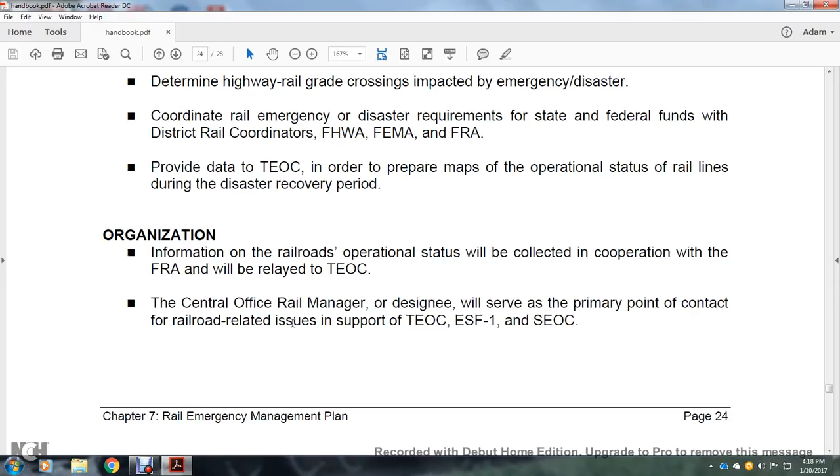The Central Railroad Manager, or designee, will serve as the primary point of contact for railroad-related issues to support the Transportation Emergency Operations Center, the emergency support function for the Florida Division of Emergency Management, and the State Emergency Operations Center.

Communication Central Railway Office will coordinate communication with the railroad and railway industry officials through a single point of contact. Radio resources for priority are directed to the areas of greatest need. The FRA will provide supplemental information on disaster-damaged railroad system operation status with preparation of up-to-date maps.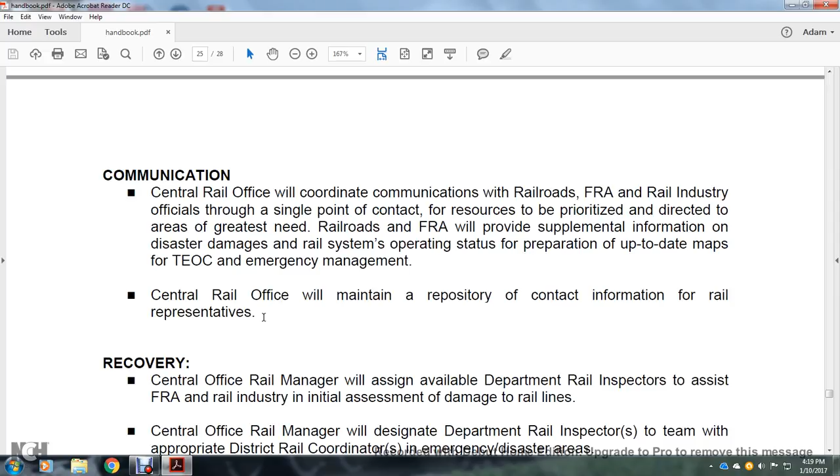The Transportation Emergency Operations Center and Emergency Management Central Rail Office will maintain a repository of contact information for rail representatives' recovery. The Central Office Rail Manager will assign available Department Rail Inspectors to assist the FRA and rail industry in initial assessment of damage to the rail lines.

The Central Office of Rail Manager will designate a Department of Rail Inspector team, coordinated with the appropriate district rail coordinator, for emergency disaster areas. Field reviews will include a minimum of two photographs of the damage and completion of an assessment of each damaged railway crossing prior to repairs.

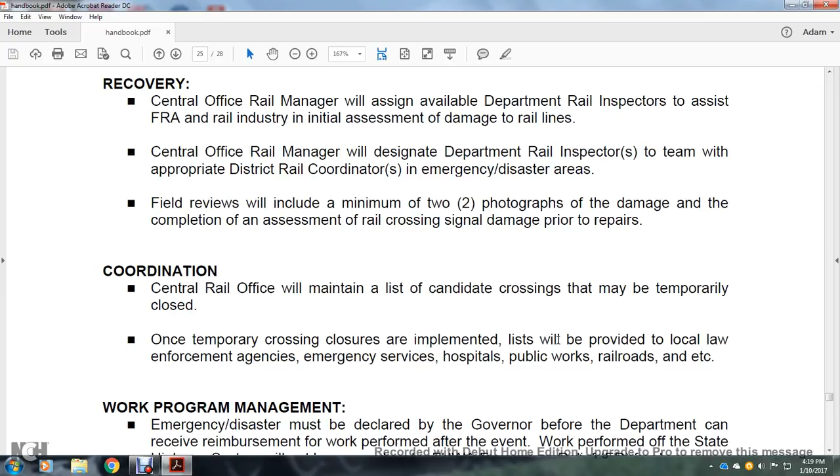Coordinated with the Central Rail Office, a list will be maintained of candidate crossings that may be temporarily closed or opened. The temporary crossing closure list will be provided to local law enforcement agencies, emergency services, hospitals, public works, railroads, etc. Working program management.

An emergency disaster must be declared by the governor before the department can reimburse for work performed after the event. Work performed off the state highway system will not be covered under the Federal Highway Administration Emergency Relief Funds.

Central District Work Program Development Office will coordinate with the Federal Highway Administration and the Federal Emergency Management Agency on repair and replacement funding. A payment agreement will be completed with the District Rail Coordinator.

The Central Rail Office will facilitate funding reimbursement following proper paperwork submission, with the District Rail Coordinator working with the Federal Highway Administration and FEMA, along with railroads and local communities, on reporting and funding eligibility.

Chapter 8: Use of locomotive horns at highway-railway grade crossings, and quiet zone application processes.

Use of locomotive horns at highway grade crossings under Title 49 CFR Parts 222 and 229 is established to maintain a high level of public safety, responding to community concerns seeking relief from unwanted horn noise, establishing requirements for sounding the locomotive horn at railway crossings in compliance with Title 49 CFR Part 222, and the application process for establishing a quiet zone.

This chapter provides guidance to all parties participating in the application. Public authorities applying for a quiet zone should contact the Federal Railroad Administration at www.fra.dot.gov/rpd/freight/1318.shtml. Definition: alternative safety measures.

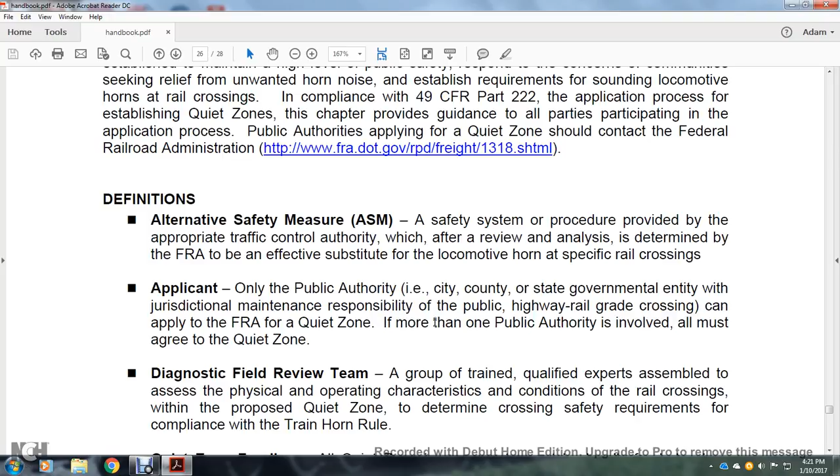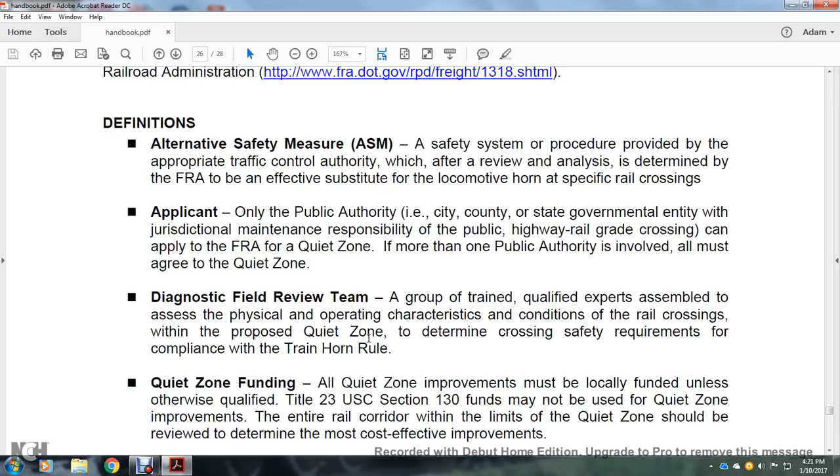If more than one public authority is involved, all must agree with the quiet zone diagnostic field review—a group of trained, qualified experts assembled to assess the physical operating characteristics and conditions of the railway crossing within the proposed quiet zone to determine the crossing safety requirements for compliance with the train horn rule.

Quiet zone funding: all quiet zone improvements must be locally funded unless otherwise qualified. Title 23 U.S. Code Section 130 funds may not be used for quiet zone improvements. The entire railway corridor within the limits of the quiet zone should be reviewed to determine the most cost-effective improvements.

A public authority—city, county, or state government entity—with jurisdiction and maintenance responsibility for a public highway grade crossing located within the proposed quiet zone may apply. A quiet zone is a section of railway line at least half a mile in length that contains one or more public crossings at which locomotive horns are not routinely sounded.

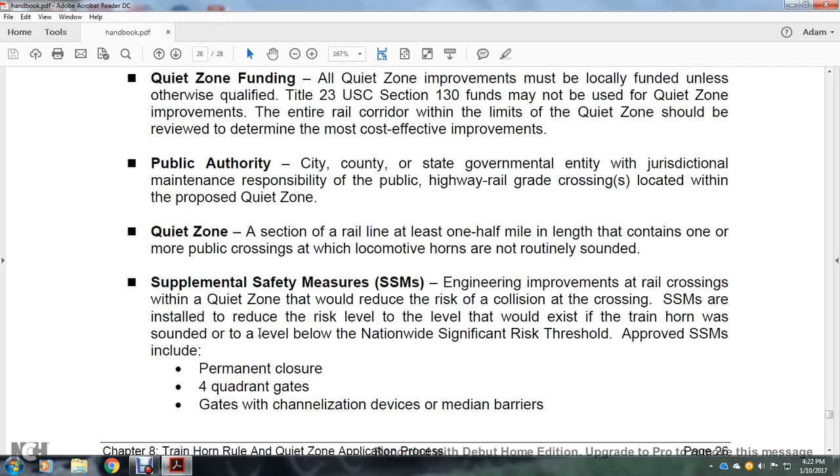Supplemental safety measures and engineering improvements at the railway crossing within the quiet zone would reduce the risk of collision at the crossing. These supplemental safety measures include installations to reduce the risk level that would exist when the train horn was sounded, to a level below the nationwide significant risk threshold approved. Supplemental safety measures include permanent closure, four-quadrant gates, channelization devices,

median barriers, one-way streets with gates that fully block the street, and temporary closure requirements for the sounding of the locomotive horn.

Safety at a public highway railway crossing requires the locomotive horn be used except where required in a zone established and maintained in accordance with Title 49 CFR Part 222.

The pattern of sounding the horn remains two long, one short, one long, repeated or prolonged until the locomotive occupies the railway crossing. The locomotive engineer may vary the pattern of the horn sounding as necessary where railway crossings are closely spaced.

The minimum volume of the train horn is 96 decibels. The maximum is 110 decibels.

All right, quiet zone application process. Public authorities: notice of intent.

Public authorities must provide a written notice of intent, allowing the 60-day comment period of the department and the railroad. Notice of intent will be provided with the Federal Railroad Administration, and to all railroads operating within the quiet zone rail line. The Central Rail Office District Rail Coordinator is

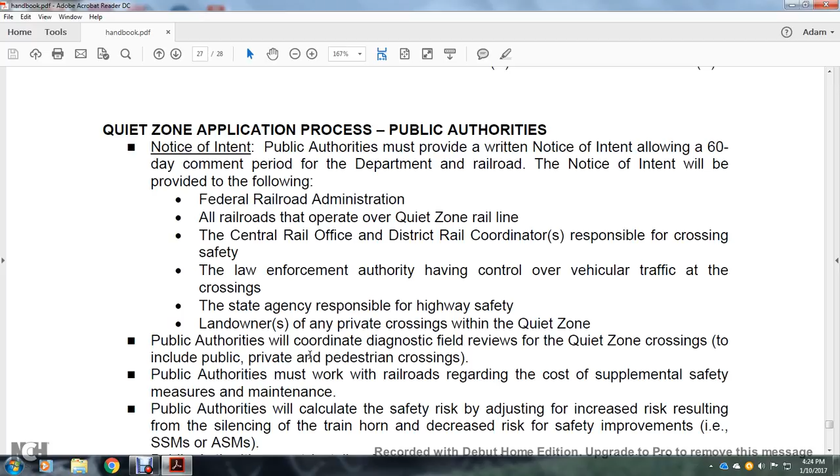Public authorities will coordinate the diagnostic field review of the quiet zone crossing to include public, private and pedestrian crossings. Public authorities must work with the railroads regarding the cost of supplemental safety measures and maintenance.

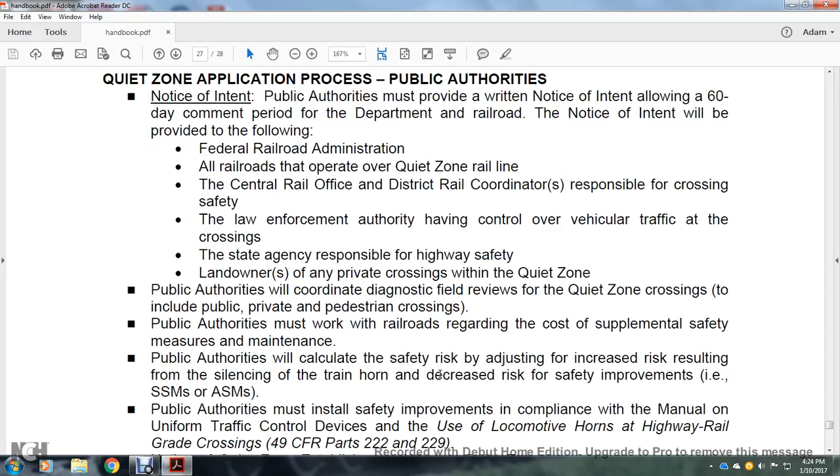Public authorities will calculate the safety risk, adjust for the increased risk resulting from silencing the train horn, and decrease the rail risk through safety improvements.

What is it? Supplemental safety measures, and ASMs. Public authority must install safety improvements in compliance with the Manual on Uniform Traffic Control Devices, use of locomotive horns on highway-railway crossings, Title 49 CFR Part 222 and 229.

Notice of quiet zone establishment. Once the quiet zone is approved by the FRA, the public authorities must provide it by certified mail. Return the receipt of the notice for the quiet zone establishment to the same recipient of the notice of

intent, no later than 21 days before the date the train horns are scheduled to cease sounding. The notice of quiet zone establishment cannot be served earlier than 60 days after the notice of intent was mailed.

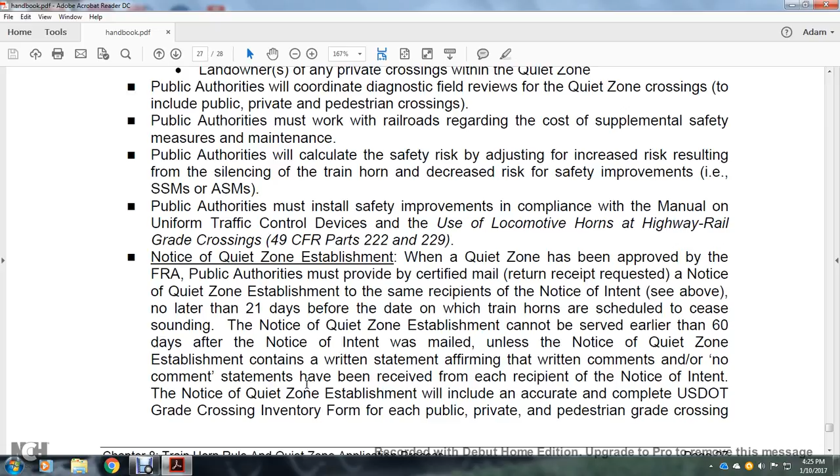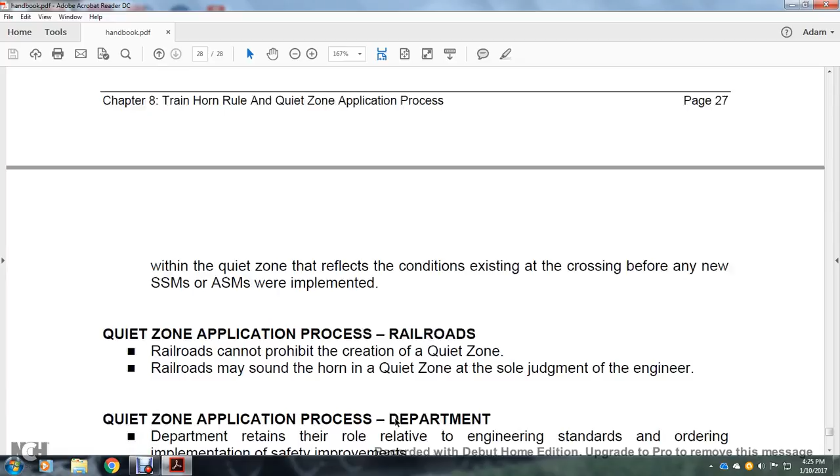The notice for the quiet zone establishment contains a written statement affirming the comments and no-comment statements received, along with the receipt of the notice of intent and the notice of quiet zone establishment, including an accurate, complete U.S. Department of Transportation grade crossing inventory form for each public, private, and pedestrian grade crossing within the quiet zone, showing the conditions existing at the crossing before any new supplemental safety measures.

Quiet zone application process: railroads cannot prohibit the creation of a quiet zone. Railroads may sound the horn in a quiet zone at the sole judgment of the engineer.

The quiet zone application process, department role. The department retains the role relative to engineering standards, orders, and implementation of safety improvements. The department provides primary expertise for highway-rail crossing safety.

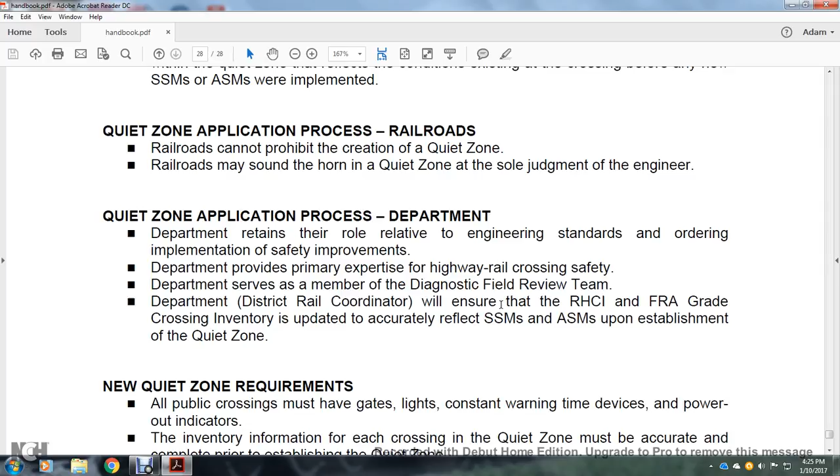The department serves as a member of the diagnostic field review team. The department's District Rail Coordinator ensures the railway-highway crossing inventory and the FRA grade crossing inventory is updated accurately with the supplementary safety measures upon establishment of the quiet zone.

New quiet zone requirements: all public crossings must have highway gates, lights, and constant warning time devices, and power-out indicators. Inventory information. For each crossing, the quiet zone must accurately complete this information prior to establishing the quiet zone. Crossings in the quiet zone must comply with the Manual on Uniform Traffic Control Devices.

Private crossing requirements: a private crossing that allows access to the public, providing access to active industrial or commercial use, must have a diagnostic field review, subject to the recommendation of the diagnostic field review team.

At minimum, each approach to every private highway-rail crossing in the quiet zone shall be marked with a crossbuck, stop sign, and an advance warning sign advising motorists that train horns are not sounded at the crossing, compliant with MUTCD standards.

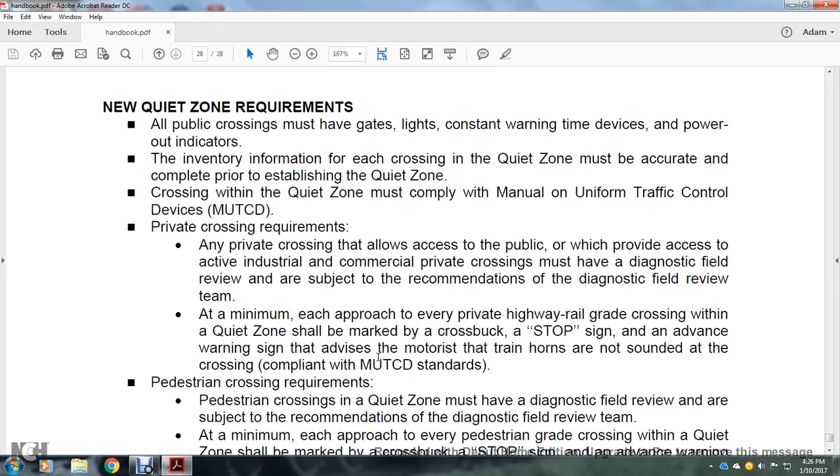Pedestrian crossing requirements: a pedestrian crossing in a quiet zone must have a diagnostic field review and be subject to the recommendation of the diagnostic field review team. At minimum, every pedestrian grade crossing within the quiet zone shall be marked with a crossbuck, stop sign, and advance warning sign advising pedestrians that train horns are not sounded at the crossing, compliant with MUTCD standards. And that wraps up this chapter of the Florida Department of Transportation Railway Handbook.